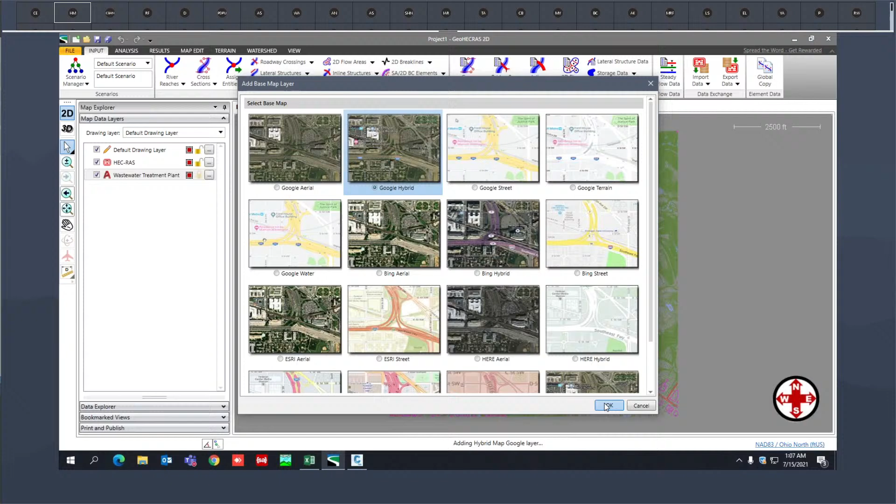Now, here you can see we have 16 different online mapping providers. We license the mapping content from these mapping providers directly from them. I am usually comfortable working with Hybrid Map by Google because this one gives a good mixture of aerial photos and labels for display. When I say OK to that, it's going to go ahead and throw a base map imagery in the background.

Now, if you notice here, our CAD drawing is perfectly lining up with the base map imagery. That is because we already had the coordinate reference system assigned to the CAD drawing. So our software automatically reprojects on the fly. Down at the bottom, you can see the coordinate reference system that we are working with.

However, if your CAD drawing doesn't have any projection associated, then in that case, you can go over to File menu, go to Map Coordinates Backstage page. Now, we list over 16,000 coordinate systems throughout the world. We have included all the coordinate reference systems that have been published and that we are aware of.

But if you have a custom CRS, that may be a well-known text file or a shapefile projection, you can directly tie that to our database. You can even mark that as favorite so that it's easy for you to use that next time. Now, you guys are from Indonesia, so if I type in Indonesia here, you can see it automatically filters out everything except Indonesia. You can see the different coordinate reference systems listed here.

If you select any of those coordinate reference systems, on the right-hand side, it will show you a small preview window showing the extent of that projection. And later, you can click on Apply to Map View. In this case, as we already have a coordinate reference system assigned, we're not going to click on Apply to Map View. Now, next, I'm going to go ahead and save the project.

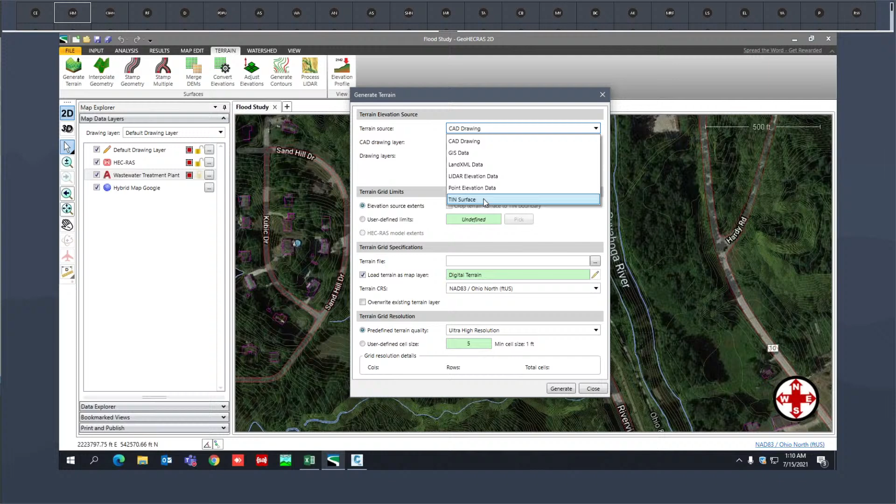Next, we need to define the CAD layers for reading the elevations. I can click on this define button. You can see all the CAD layers listed here. In this case, we are working with just the GIS contour. So I'm going to check that layer on. If you want the software to read the elevation from multiple layers, you can select them as well. I'll say OK to that.

Next, you can define your terrain grid limits. Here we will go with the elevation data source extents. That's the extents of our CAD drawing. Let's go ahead and save the terrain surface. Click on this browse button. Now, before we save it, from the drop-down you will notice that we can save this elevation grid in any of the 4 industry standard formats. We're going to create a GeoTIFF elevation grid and name it as 3D terrain.

Next, we can define at what grid resolution to create a terrain surface. I'm going to manually enter a value of 3 feet. That's about a meter. It's going to generate about 7.7 million cells. Click on generate. Now the software is building a terrain surface for us. We are going to utilize the terrain surface for figuring out the extents of flooding and for 3D visualization.

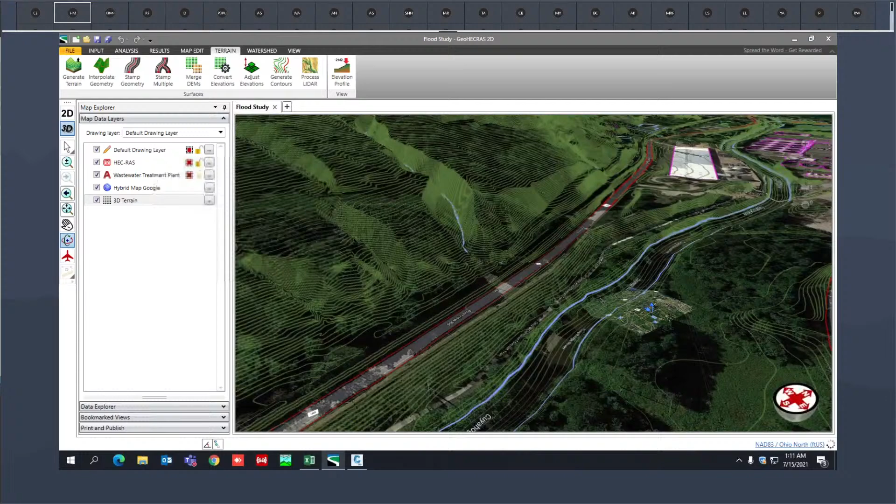Once you have your terrain layer added, you can now switch to a 3D mode. You can grab this rotation tool to rotate the view around. As you rotate the view around, you will notice everything is in 3D now. You can right-click on your terrain layer and choose Zoom to Layer Extents so that you can see the extents of our loaded elevation terrain data.

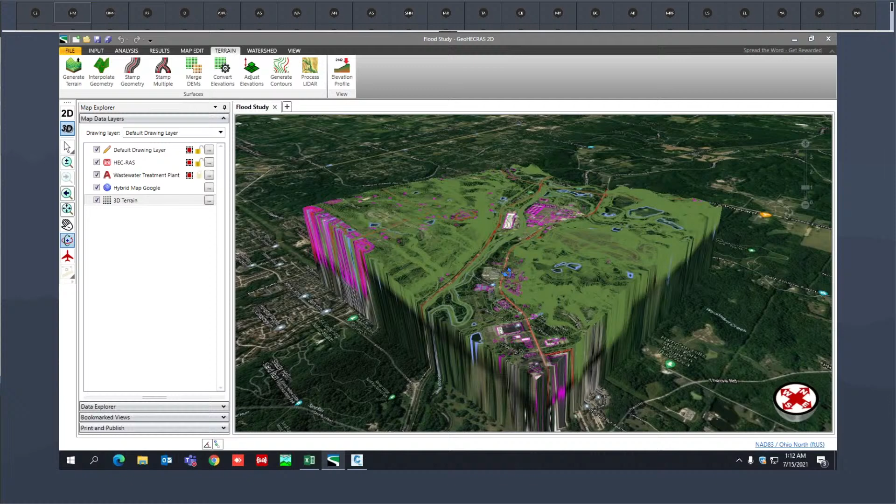Guys, can you just mute your microphone? Pedro, yeah, Pedro has a microphone. Can you just mute your microphone, please?

All right. Now you can see the extents of our loaded elevation terrain data. Now, we as civil engineers commonly run into a problem that we run out of elevation data. What we have done, we have licensed the elevation data from NASA, and we have hosted that on Microsoft Azure Enterprise Cloud Computing Platform. So I'm going to backfill the elevation data beyond the extents of our loaded elevation terrain data.

From our map data layers panel, I'm going to right-click and choose Add Elevation Layer. Now, if you have the elevation data saved locally on your computer hard drive or network drive, you can directly load that. You can see here the supported file formats that the software can read. You can bring any kind of elevation file format. You do not need to do any data conversion. In this case, we're going to go with the online elevation data that is hosted on our cloud. I'm going to have the software use that.

Now, as you are GIS users as well, I'm going to bring in some additional layers that Summit County GIS department provided us. From our map data layers panel, I'm going to right-click, and to bring in any kind of data, you just need to choose Add Layers.

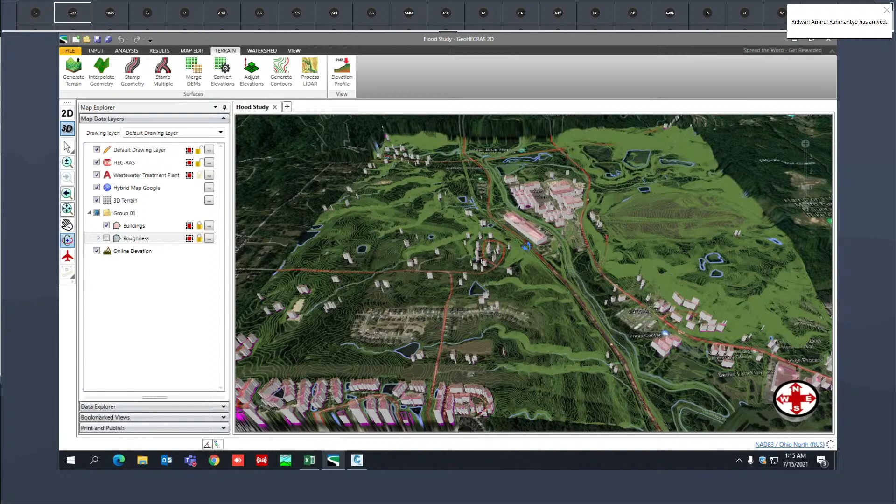You can also see those 3D structures. Now, these 3D structures are basically polygons representing the footprint of the building. We told the software to offset these polygons above the terrain a bit in order to make it look like these are 3D structures. Now, these buildings can be customized.

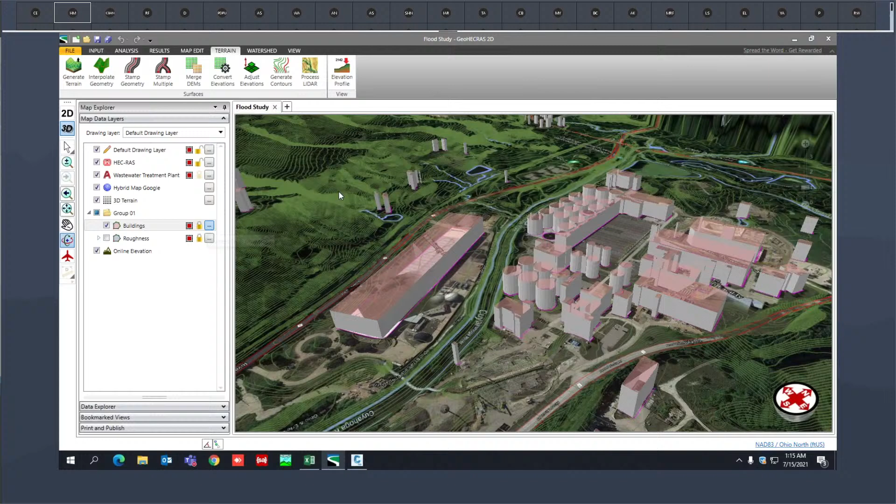If you want, you can click on that three-dot button. That's the Properties button for the buildings layer. It opens up your GIS Polygon Properties data dialog box. You have an option to change the color for the border stylization. You can change the color for your polygon fill.

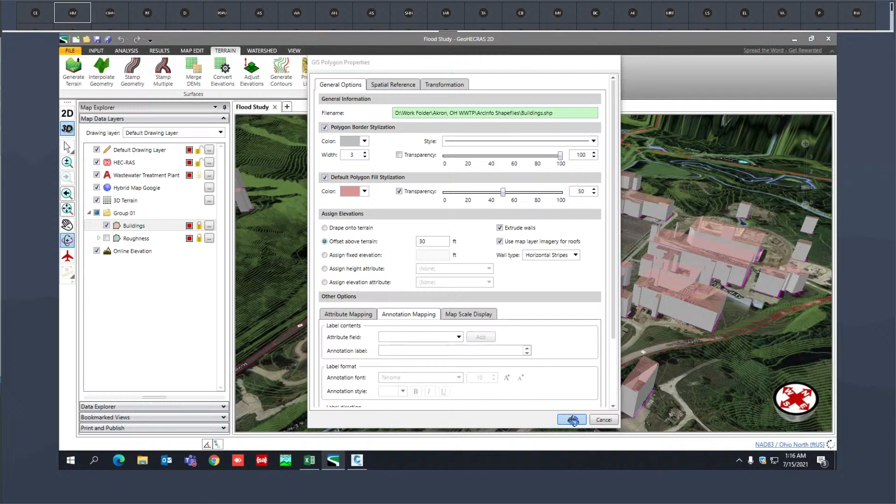Now, these buildings are just the footprints, so they do not have any height or elevation attribute associated. So we can simply tell the software to offset them above the terrain, let's say 30 feet. We can extrude the walls and use map layer imagery for the roofs. When I say OK to that, you will see how well those buildings have now been modified.

The next thing I want to do is to define my river. I can go over to Input menu, go to River Reaches menu. We have multiple ways that we can define our river reaches. If you already have a river alignment available in your AutoCAD drawing file or as a shape file, you can directly assign that. If you have a survey file that contains the river geometry, you can import it. If you have your existing HEC-2 or HEC-RAS model, you can georeference the river reaches.

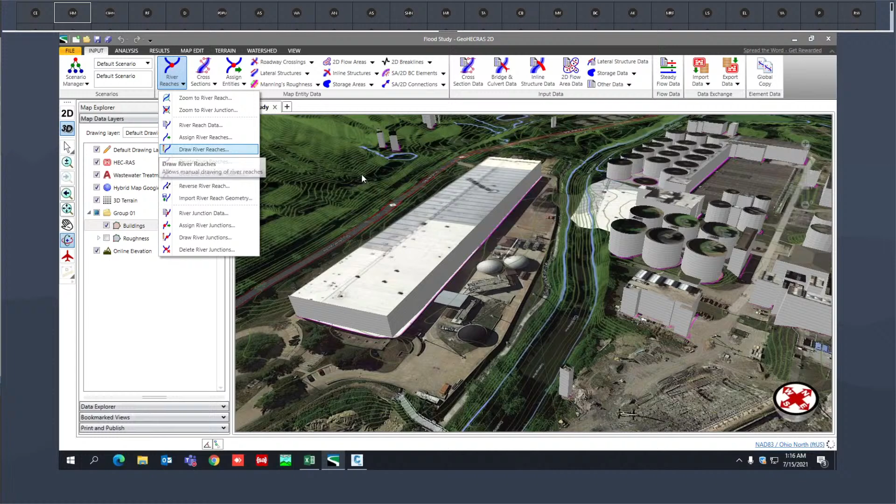In this case, we're going to use the Draw River Reaches command. If you notice, the software automatically puts me back into a 2D mode. It's going to create a curvilinear polyline. Click on that Draw button. If you notice and read down at the status bar, it says draw reach in an upstream to downstream direction. This river over here flows towards the north.

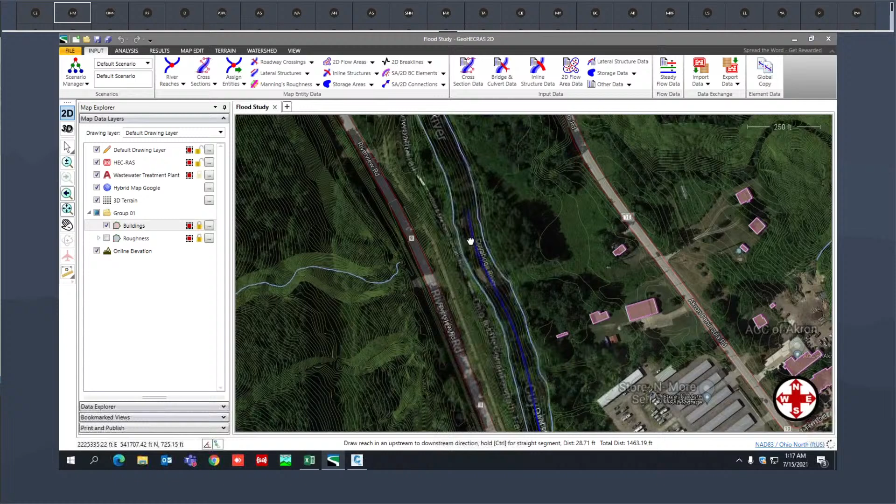So let's go ahead and start digitizing our river. I'm going to start over from here. You simply need to click and drag like I'm doing here. What's happening here in the background is that the software is built on top of AutoCAD. As I am digitizing that river, it's running a spline command in the background that is automatically curving that line for us. That gives our river kind of a more natural look.

If you already have those alignments somewhere available in your AutoCAD drawing file or as a shape file, you do not need to spend a lot of time digitizing the river reach. You can simply assign those alignments as your HEC-RAS river reach, and that's going to save a lot of time. Now, what I'm doing here, I'm just looking at those contours and trying to figure out where the channel thalweg is. Now, once you're done, you simply need to right-click and choose Done.

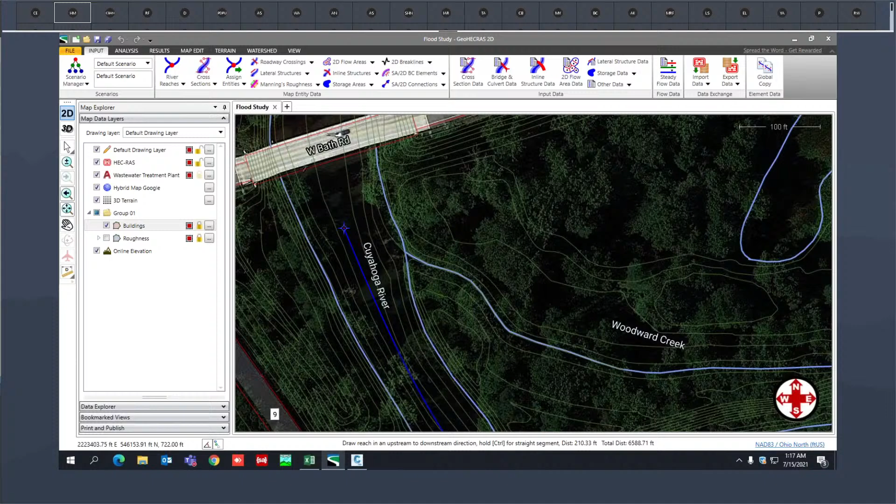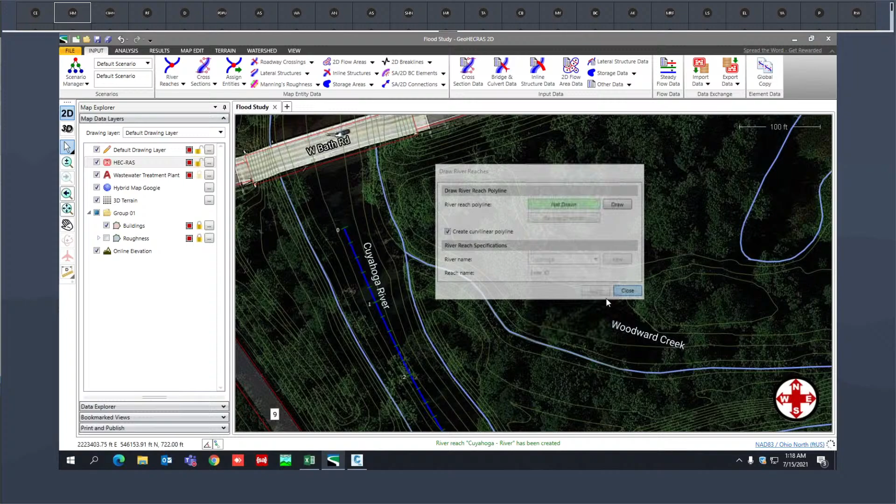Now, the software wants to know the name of the river and the reach. If you see on the map view, this is Cuyahoga River. I'm not a very good speller. It's good that I can see that on the map view. I can click on that New button. Let me type in the name. Let's call it Cuyahoga, give it a reach name as river, and click on Apply. Let me close the dialog box. If I zoom out and pan, now you can see the flow direction arrow on the map view.

Now, let's say you have defined your river in a wrong direction. You can right-click on the river alignment. It will open up your right-click context menu. And you can choose to reverse the river reach, and it will reverse your flow direction in case you have drawn your river in a wrong direction.

You can also choose Edit Vertices. You can see those small vertices here. I can grab any of those and move them around. I can click and add more vertices as well. Now, you do not need to do that. What I am really trying to point out here is that we have unlimited command over undo and redo.

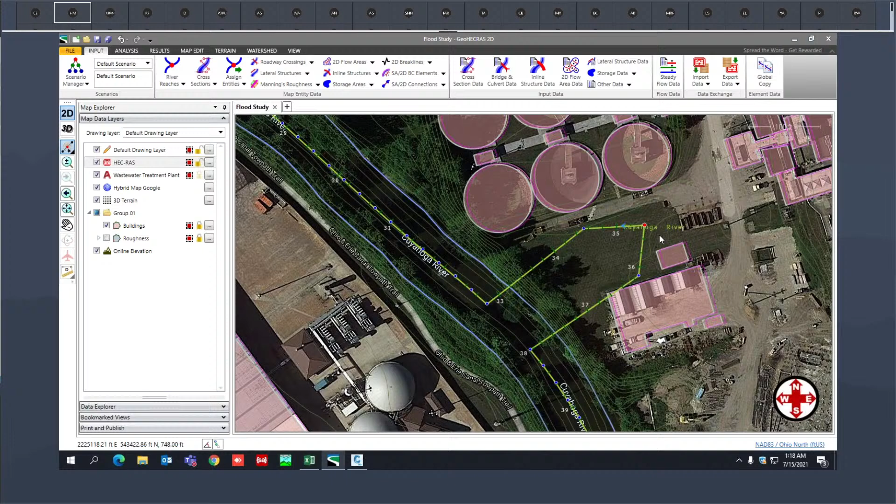If I turn off the base map imagery, let's say that you have made any mistake in your model, or you want to take a different direction. You can go to this undo stack option, undo all the changes that you have made, and you will be back in your project. You can also press Ctrl+Z to undo the changes.

Anyways, next thing I want to go ahead and define my cross sections. I can go to cross sections menu. Now, if you already have the cross sections or the alignments for the cross sections available on the map view, like from AutoCAD drawing file or as a shape file, you can directly assign those alignments as your HEC-RAS cross sections.

If you have a survey file that contains the cross section geometry, you can import that. If you have your existing HEC-2 or HEC-RAS model, you can georeference the cross sections. You can also manually draw in the cross sections. However, I'm going to have the software automatically draw them in. So we're going to use the automated draw cross sections command.

Now, the first thing that you need to do here is to define the downstream cross section stationing. You can tell the software how you want the cross section stationing to be. In this case, the project is in the US, so I'm stuck with feet and miles. In this case, I want the cross section stationing to match the river stationing in feet.

However, for your projects in Indonesia, you guys work with metric units, either meters or kilometers. When the software starts up, it automatically senses which country you are in. And if you are outside of the US, it will automatically default to metric units. You can also define the spacing between the cross sections. Here, I will go with the default value of 500 feet.

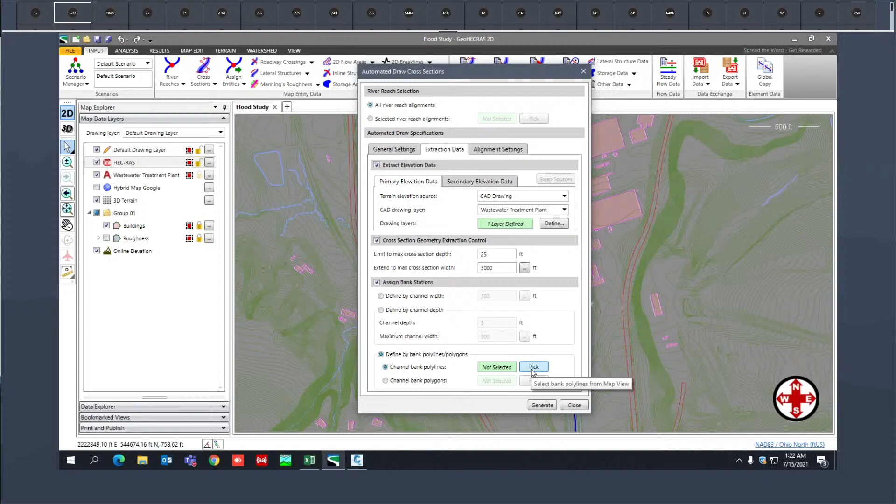You can also tell the software where the channel banks are. You can define your bank stations based on your assumed channel width. You can define that based on your assumed channel depth. Or if you have the polylines or polygons with you that represent your overbanks, you can utilize them. You can simply click on that pick button. In this case, we have the polylines.

Click on that pick button, zoom in a bit, and pick one of those alignments. To pick all others, simply right-click and choose Select Similar. It will select all others in the same layer. You can again right-click and choose Done. Now it says here we have 242 of those polylines selected. Click on that Generate button, and the software is generating our cross-sections. Let's take a look at what it did.

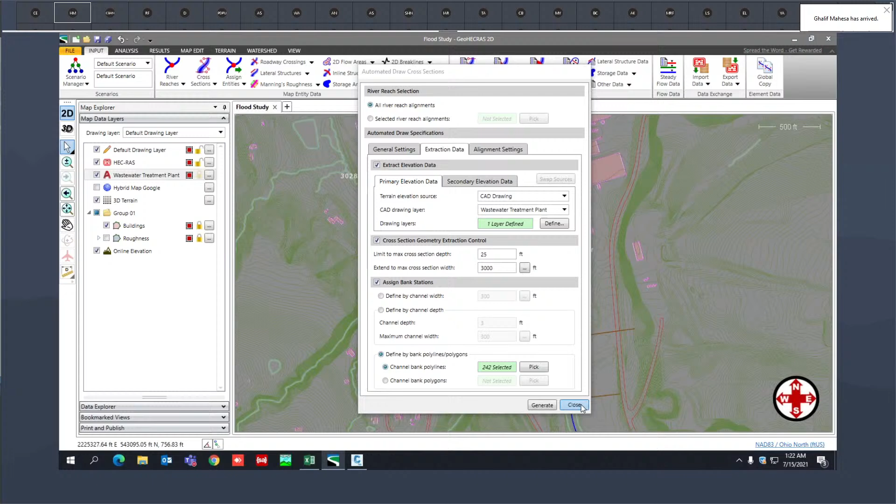If I close the dialog box, if I zoom out and pan, you will notice the software has automatically figured out how far it needs to extend the cross-sections to get 25 feet of depth. Now here at the wastewater treatment plant, the ground terrain is very flat, so the cross-sections had to be extended out quite far. There is a lot of flooding that's occurring at that plant.

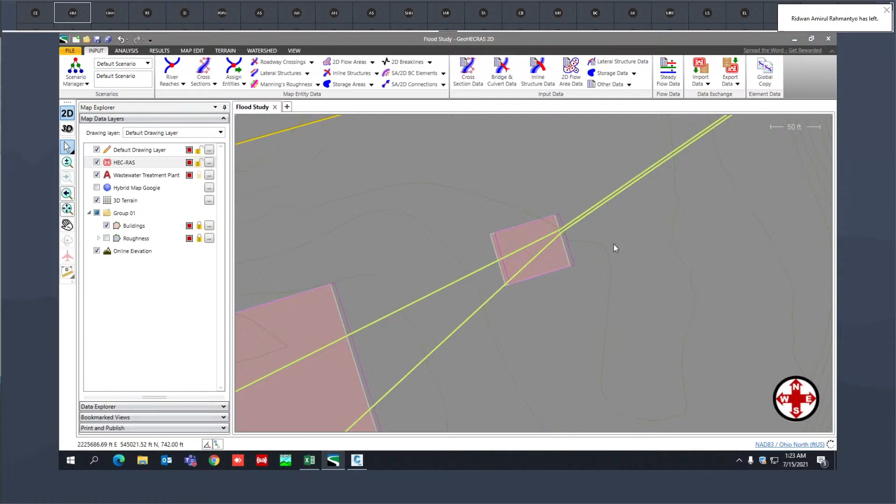In fact, if I zoom in a bit, you will notice that these two cross-sections are wanting to cross each other. But the software identified that and automatically bisected the intersection angle and ran these cross-sections parallel to each other. If you have two cross-sections crossing each other, that accounts for double conveyance and could be erroneous.

Now to view the cross-section, you can simply go ahead and double-click on the cross-section. It opens up our cross-section data dialog box. Here you can see your cross-section geometry, the channel thalweg, your bank stations. As you scroll through your geometry table, you will notice the highlighted rows representing your bank stations. You can see your bank stations down at the bottom as well.

Initially, the software assigns the default Manning's values based on what's in the channel and the overbanks. Here, it's using a default value of 0.032 for the channel and 0.045 for the overbanks. Now, these are just the default values. We're not going to use them. Later, we're going to map over the roughness from the shapefile that we loaded. It's going to assign the Manning's values to your cross-sections based on the horizontal stationing rather than what's in the channel and the overbanks.

Now, let's say that you want to go ahead and define a small flood wall on this left overbank. You can grab this pencil tool. It will put you in graphic edit mode. You can grab any of those ground shots and move them around. As you move the ground shots, the software automatically updates the table for you.

You can also choose to add more ground points. You can grab this Add Ground Points tool from the Tools palette here. I want a ground shot, let's say one over here and one over here. I can go ahead and zoom in a bit and define that more accurately.

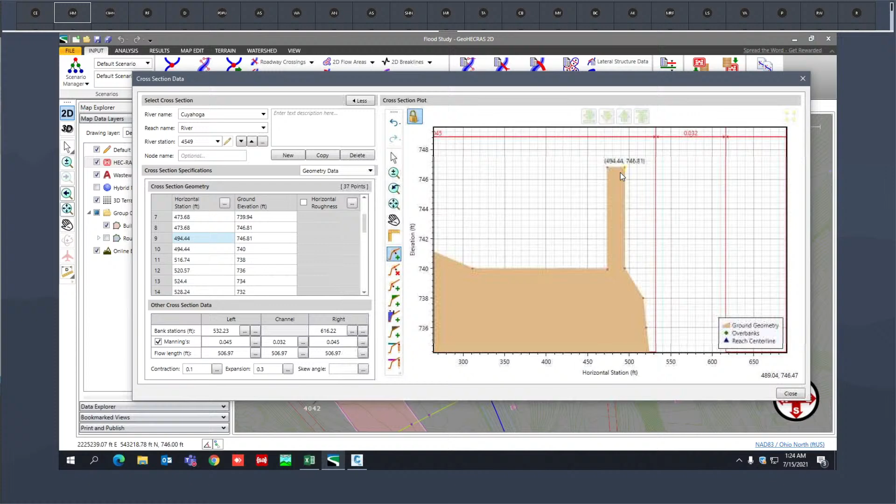Now, if you put in a structure like this in HEC-RAS, it will assume this is a divided flow. You will have a situation where it will show you the water within the channel and beyond that flood wall. So you will need to explicitly call it as a levee. You can grab this Add Levees tool from the Tools palette here. You can zoom in a bit and place a levee on the top of it.

If you notice, the software automatically switches me to an appropriate data panel, that is the levees data panel, and all the information has been automatically defined. So you do not need to manually define that information.

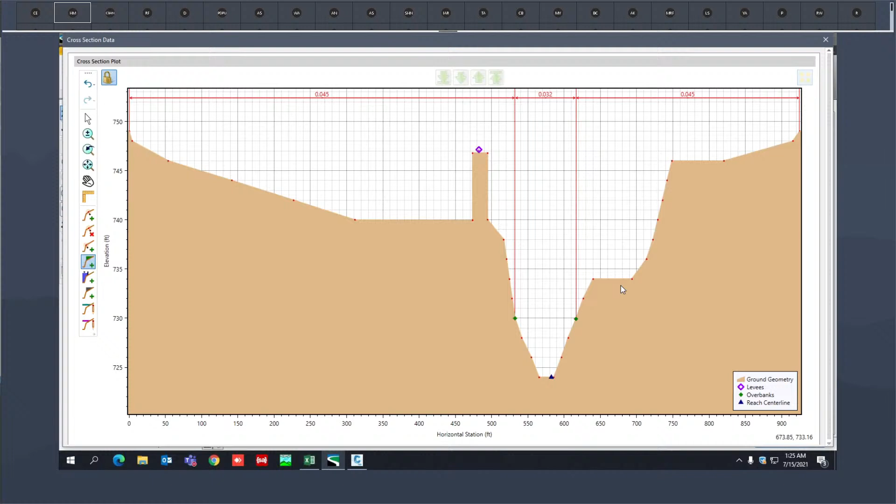One more thing that I want to point out here is that if I maximize the plot, on the right overbank, you can see there is a kind of a dead swale where I don't see much flow. I may want to mark this area as ineffective. I can grab this Add Ineffective Flow Areas tool from the Tools palette. I simply need to click and drag.

If I restore the plot, you will notice it again switches me to an appropriate data panel, that is ineffective flow areas, and the information for the right overbank, stationing, and the elevation is automatically being defined there. You may also want to mark this ineffective flow area as permanent. Simply check this box and we're all done here. Let me go ahead and close the dialog box.

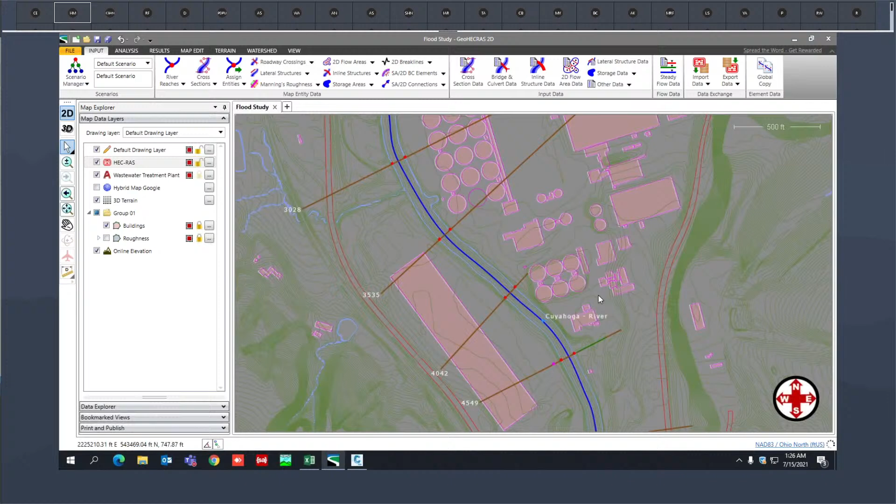Now, GeoHECRAS provides several GIS mapping functions that will help us map over GIS attribute data to the HEC-RAS model. And we may want to map over that land use roughness that we loaded. So let me turn that back on. Now, if I select any of those land use polygons on the map view and expand the data explorer, you notice that there's a roughness value associated to each of those polygons.

Now, from those polygons, we're going to map over the roughness data to our cross sections. To do that, from the Input menu, you can go to the Manning's Roughness menu and choose Assign Manning's Data. The first thing that you need to do is to select all the cross sections to which you want to map over that roughness data. Click on that Select All button.

Under the Polygon Layer tab, now you will need to define the Manning's layer and the attribute you're looking to map over to your cross sections. However, the software is smart enough. It automatically selects the appropriate layer, and from that layer, it automatically figures out which attribute to use. You can also see it figures out your maximum and minimum roughness values from the shapefile. You simply need to click on OK. It says Manning's roughness data successfully assigned.

Now, if I zoom in a bit, you will be able to see those sub-roughness areas as segments on the map view. You can see this polygon had a value of 0.055 assigned to it. Now that value has been assigned to your cross sections and can be seen as a roughness segment on the map view highlighted in purple. You can even see the corresponding Manning's roughness values showing up on the map view.

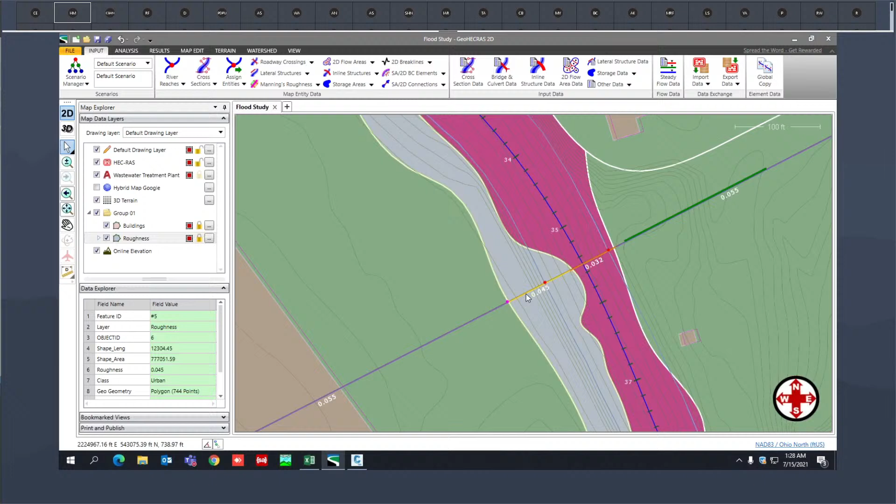Now from this polygon, there was a Manning's of 0.045 associated. That value has now been mapped over to your cross sections and is highlighted in the yellow segment. So you can see those roughness values on the map view as well using the roughness segments. Now let me do one thing. Let me turn off the roughness layer. Let's take a look at what it did. I can double click on the cross section.

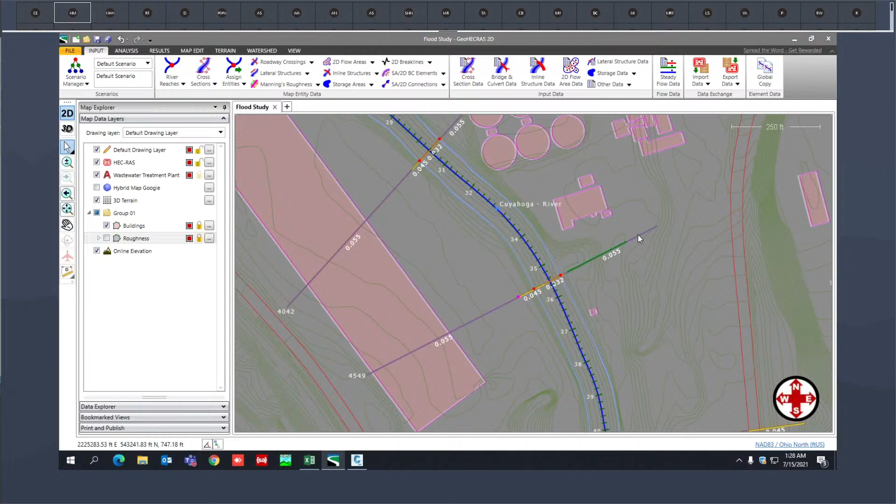From the drop down, if I go back to the geometry data panel, you will notice that the default Manning values that the software was earlier utilizing are grayed out. They're gone. Now the software is using the Manning's values from the shapefile. You have the multiple sub-roughness areas assigned to your cross sections based on the horizontal stationing rather than what's in the channel and the overbanks.

Now you also have an option to edit these sub-roughness areas. You can grab this graphic edit tool or the pencil tool. You can hover your cursor on the top of any of those lines. You can see that highlights it. If you click and drag, you can move it around. Once you release the mouse, it will snap to the nearest ground shot. And the geometry table for the horizontal roughness will be automatically updated.

If you're not happy with the changes and you want to go back, you have an undo option here as well. You can undo the changes and you will be back in your project and the table will be automatically updated or reset to default. Let me go ahead and close the dialog box.

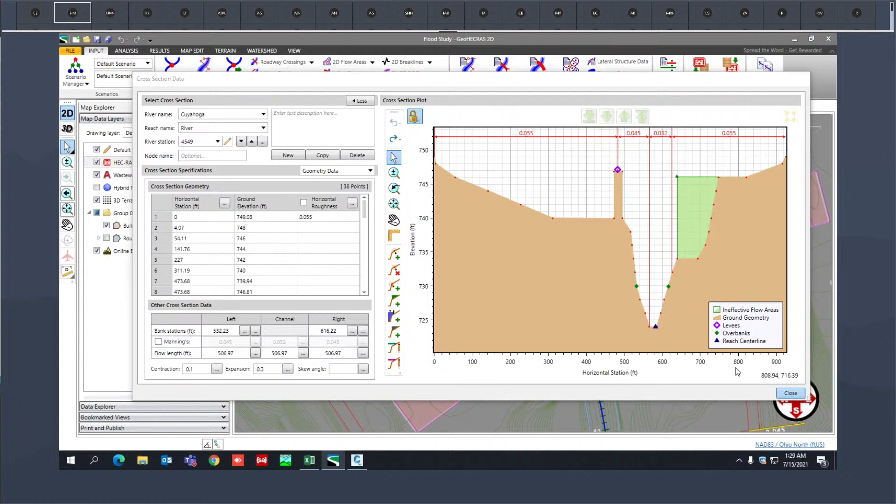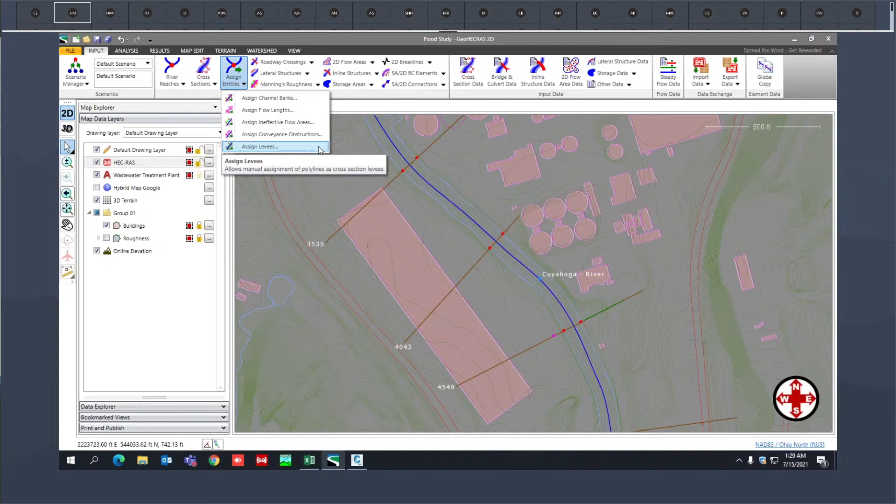We can also map over other data to the HEC-RAS model. If I go to Assign Entities menu, we can assign channel banks, we can assign flow lengths, we can assign ineffective flow areas, we can assign conveyance obstructions, and we can assign levees. I may want to assign these buildings as my conveyance obstructions. From Assign Entities menu, choose Assign Conveyance Obstructions. Simply select all the cross sections to which you want to map over those buildings as conveyance obstructions. I'll click on that Select All button.

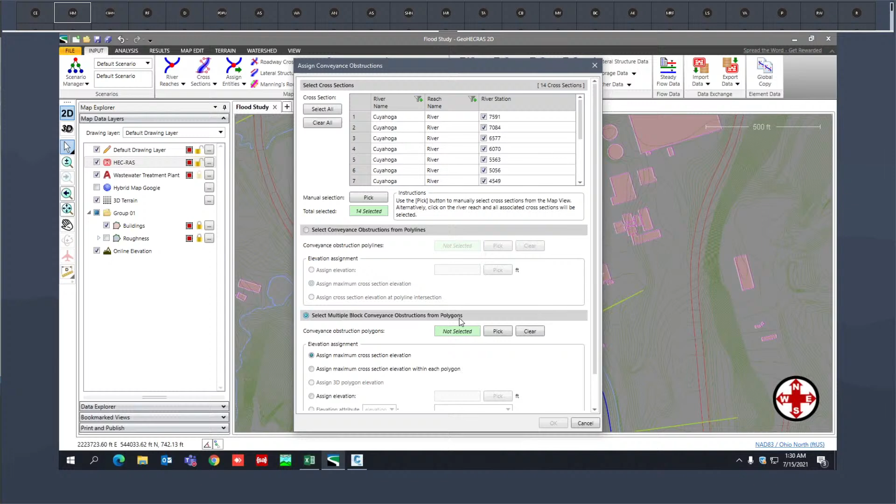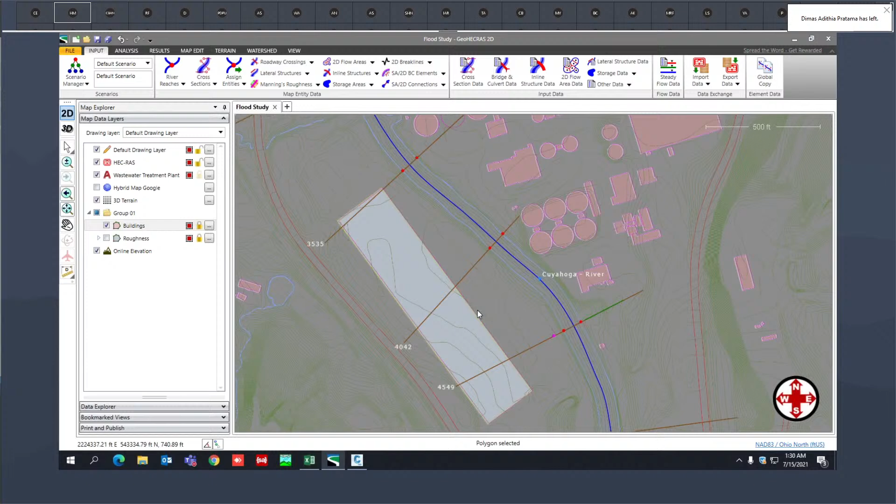Now you have an option to assign those conveyance obstructions from polylines, or you can assign those buildings as conveyance obstructions from polygons. In this case, we have the polygons. I can click on that pick button. I can pick one of those polygons on the map view. To pick all others in the same layer, right click and choose select similar. It will select all others in the same layer. You can see all of the building polygons glowing on the map view. You can right click again and choose done. Now here we have 352 of those polygons being selected.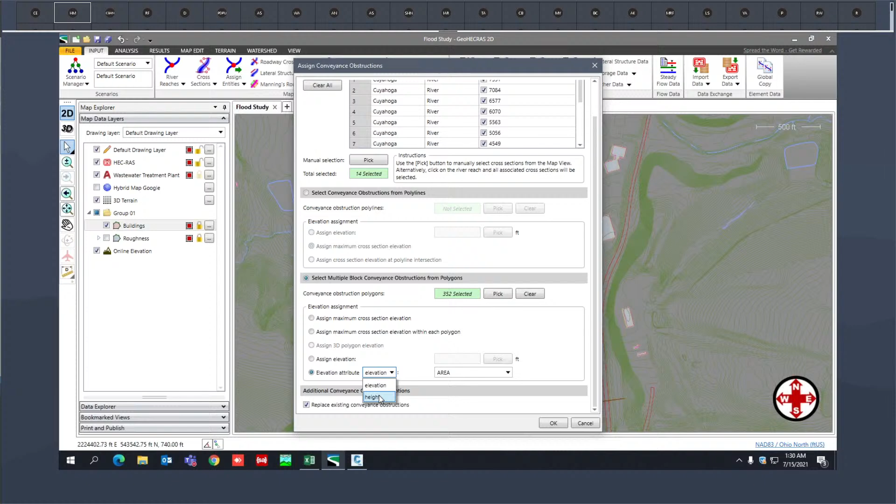For the elevation assignment to those conveyance obstructions, we're going to assign the maximum cross-section elevation. However, if the polygons have attributes like elevation or height associated, you can utilize that as well. I'll say okay to that. It says conveyance obstructions have been assigned. Now let me do one thing. Let me turn off my buildings layer and let me turn my base map back on.

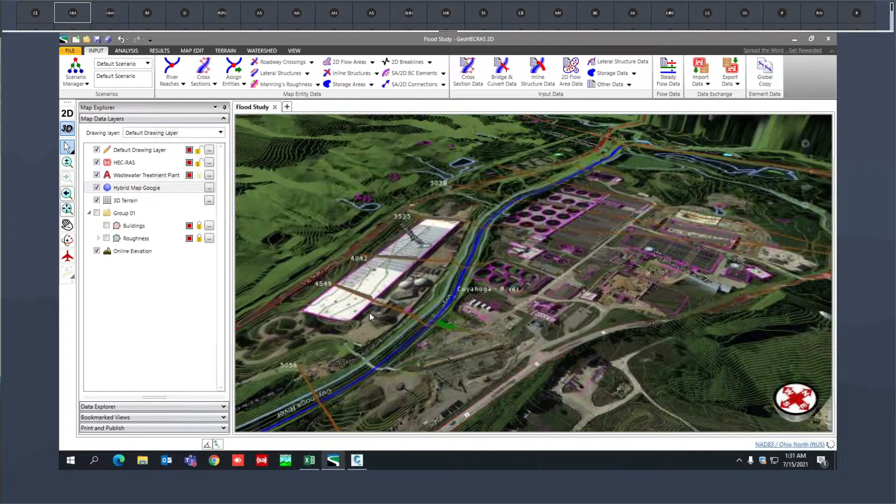Let's take a look at those cross sections in 3D. I can switch to a 3D mode. Let me zoom in a bit here. And you will notice why I would mark this area as ineffective. You can see there is kind of a dead swale. If the water goes in that area, it will not be conveyed downstream. It will be stagnant over there, swirling with zero velocity associated to it. So that's why that area needs to be modeled as ineffective.

On the other side of this cross-section, you can see the conveyance obstruction being mapped over to your cross-section. However, there's a problem here. If you notice, there's a small extension to this building that I was previously unaware of. What I can do, I can double-click on the cross-section. From the cross-section data dialog box, I can grab this Add Conveyance Obstruction tool from the Tools palette. Once you click on that, now you can click and drag and draw that extension to it.

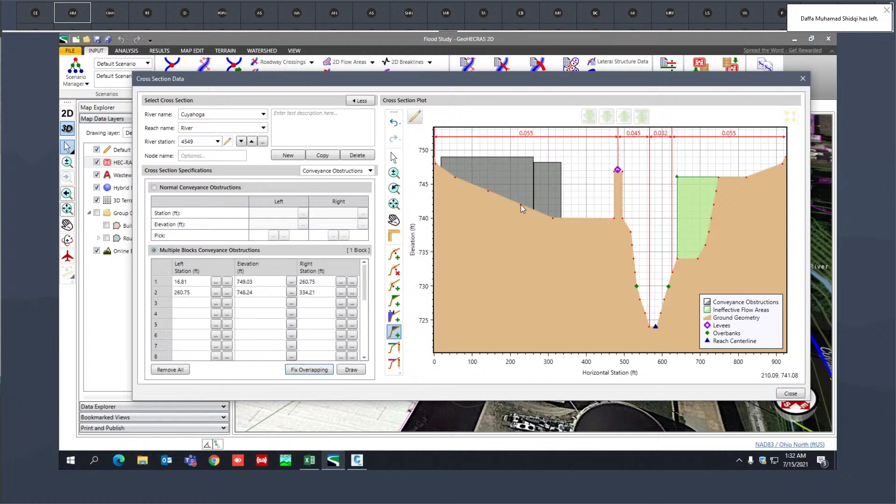HEC-RAS doesn't like this overlapping. To fix that, click on that Fix Overlapping button, and it does the trick for us. Let me go ahead and close the dialog box. On the map view, you can see that extension being added.

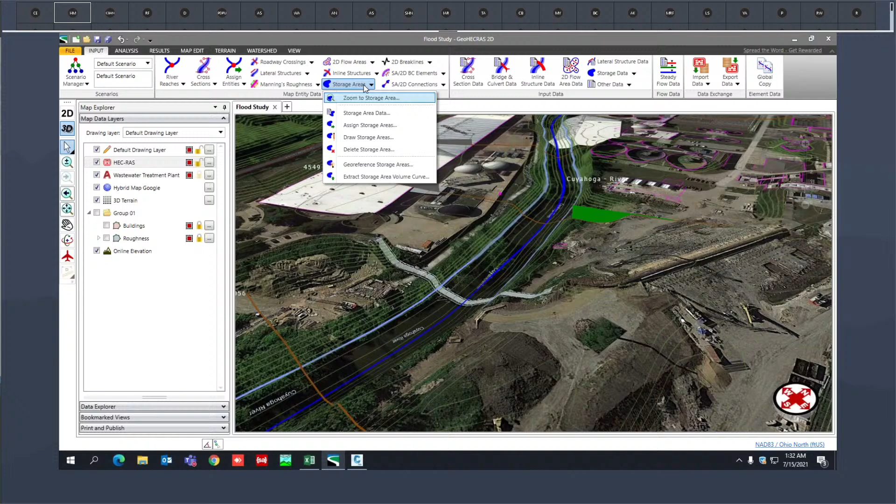Now, GeoHECRAS is a complete data wrapper to HEC-RAS, so it supports all aspects of HEC modeling. So you can define your roadway crossings, like bridges and culverts. You can define your 2D models, including hybrid models that have both 1D and 2D components. You can also define your lateral structures, such as flood walls, levees, and levee failures. You can define your inline structures, such as dams, spillways, and dam failures. You can define your storage areas like inline lakes, reservoirs, detention ponds, and off-channel storage areas.

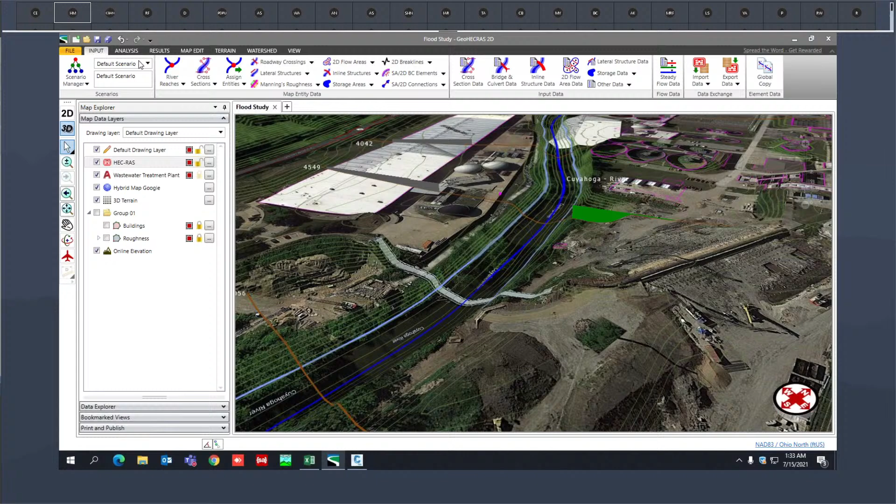If I go over to Analysis menu, we can model both steady flow and unsteady flow models. We can also do the steady flow calibration or compute scour at bridges. Now we're almost ready to run the model. We just need to define our boundary condition. In this case, we're going to run this model in steady state. From Input menu, I'll go to Steady Flow Data. This opens up my Steady Flow Data editor.

I'll go to the Flow Data tab. Let's say we have 3 different profiles for 3 different return periods. Let's say for a 25-year, 50-year, and then 100-year storm. We need to now define the corresponding discharges.

Now for 25-year, let's say we have a discharge of 8,000 CFS, that is cubic feet per second. However, there in Indonesia, you work with cubic meter per second. So we can work with both the units. For 50-year, I'll set that to 12,000. For 100-year, I'll set that to 16,000.

Next, we need to define the downstream boundary condition. And here, in this case, I'm going to set that to normal depth. And HEC-RAS will compute the starting water surface elevation based on the defined energy slope. Now, what you can do is measure the water surface elevation at 2 points near the downstream end of the river to approximate that slope.

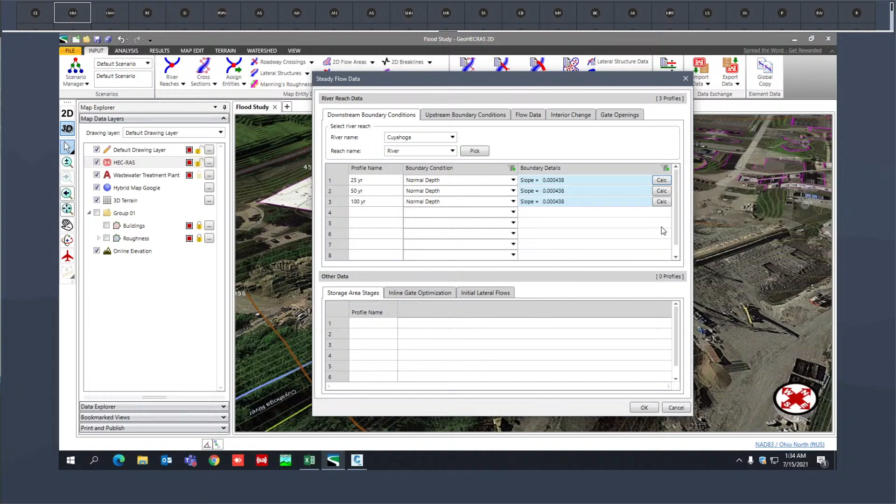However, many times you cannot do that, since that might be someone's property you do not have access to, or you do not have the engineering budget to measure it. Whereas in our software, you can click on the Calc button. The software will automatically compute an approximate energy slope by looking at the channel bed bottom slope. Software will run various trend lines upstream from the downstream boundary for up to 1 kilometer, and then use best fit line algorithm to estimate what the energy slope is.

If you already know what the slope is, maybe you have computed that already on the field, you can type that in here. I'll have the software calculate that for you. I'll say okay to that. Now we are ready to run the model. I can go over to Analysis menu and click on that small running person, Compute Study. It's going to go ahead and run our HEC-RAS simulation.

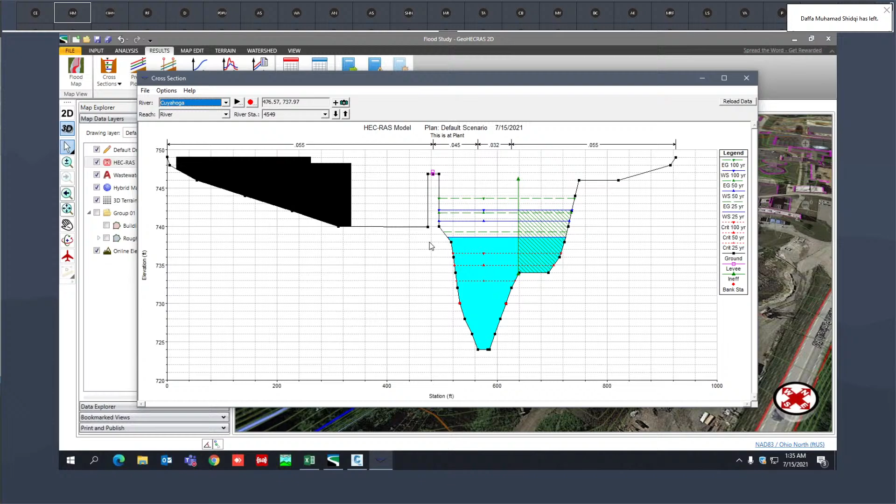As the HEC-RAS simulation has completed, let me go ahead and close the dialog box. Next, we can take a look at the results. You simply need to go to Results menu. Let's take a look at the results for this cross-section here. I can select that cross-section on the map view and then go to cross-sections. The end results that you will get would be directly from HEC-RAS. We are a complete data wrapper of HEC-RAS. Let me go ahead and close the dialog box.

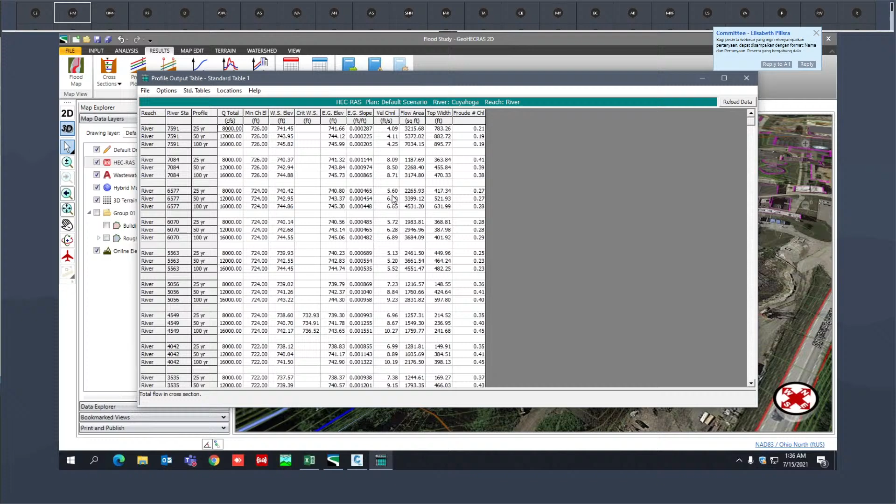You can take a look at the other results like the profile plot showing you the longitudinal profile of your model. You can also take a look at your rating curve. You can look at your stage and flow hydrographs for your unsteady flow models, or the detailed output table for each of those cross sections or any hydraulic structures in your model. You can also take a look at your summary output table. Now, these are the standard HEC-RAS output tables. So you do not need to worry about the accuracy of the results. So let me go ahead and close that.

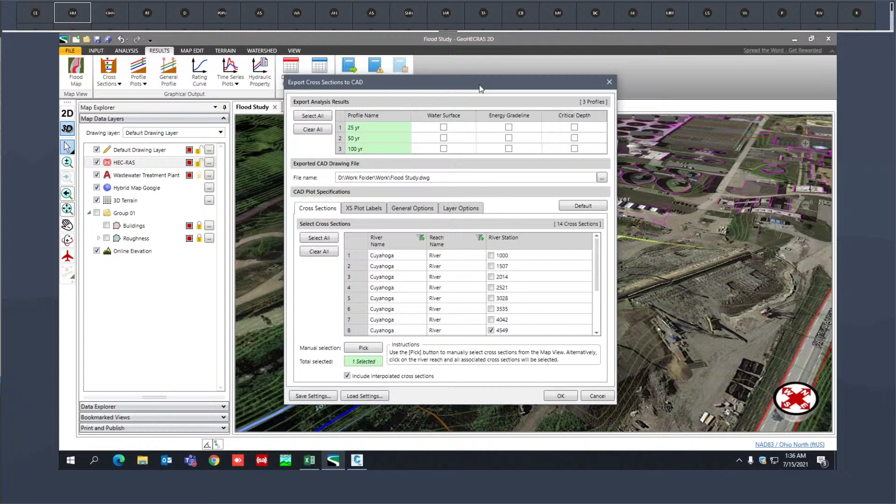Now, if you want, as your CAD users, you have an option to export these cross-section plots out to AutoCAD. If you click on the drop-down where it says cross-sections, you can choose Export Cross-Sections to CAD. So let's go ahead and export our cross-sections to AutoCAD. Now here, you can also have the software include the analysis results. So here I will have the software include the results for my 100-year water surface profile. I'm going to have the software export out the water surface, energy grade line, and critical depth.

I can go ahead and save the file, click on that browse button. I can navigate to my Exported CAD folder, and let me go ahead and rename this to XS Plots. Now from the drop down, you will notice that we can save this file in any of the formats, starting from DGN format if you're a MicroStation user, DXF all the way to DWG 2018. Click on Save. Simply select all the cross sections which you want to export out to AutoCAD.

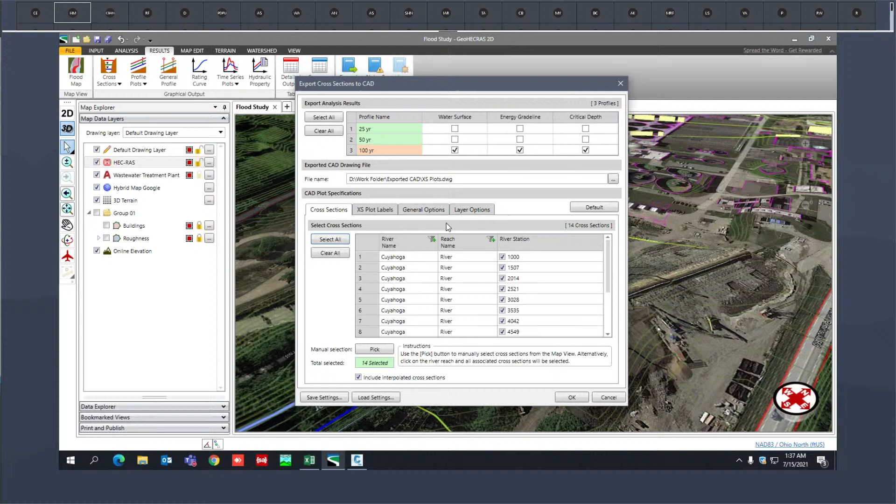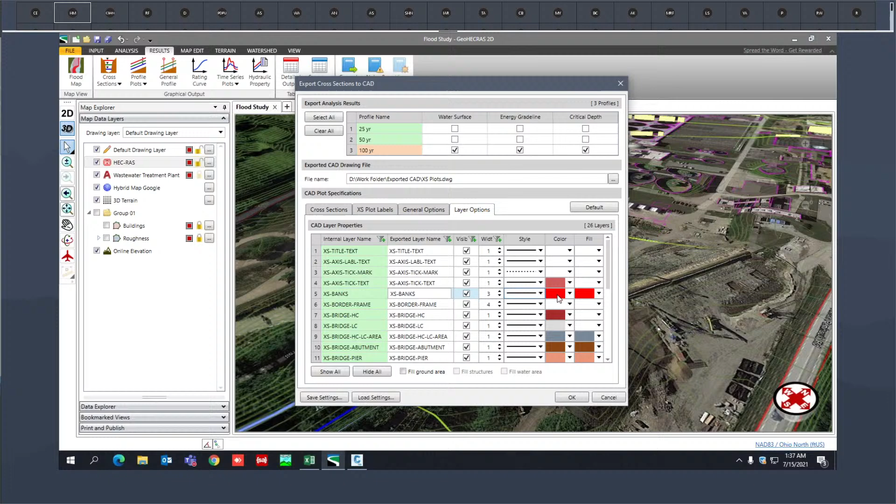Under the layer options, we have already provided the internal layer names. Like for the banks, we call them XS banks, cross-section banks. However, you have an option to rename them. Maybe your client has a different requirement. They want to call it something else. So you have an option to rename it as well. You can also change the line style, the color, and the fill. You can also have the software fill the ground area, fill structures, and fill water area.

Click on OK. It's going to go ahead and write those cross sections out to AutoCAD. Now, if I go ahead and open up AutoCAD here, let me open those cross section plots in AutoCAD. Just give it a moment.

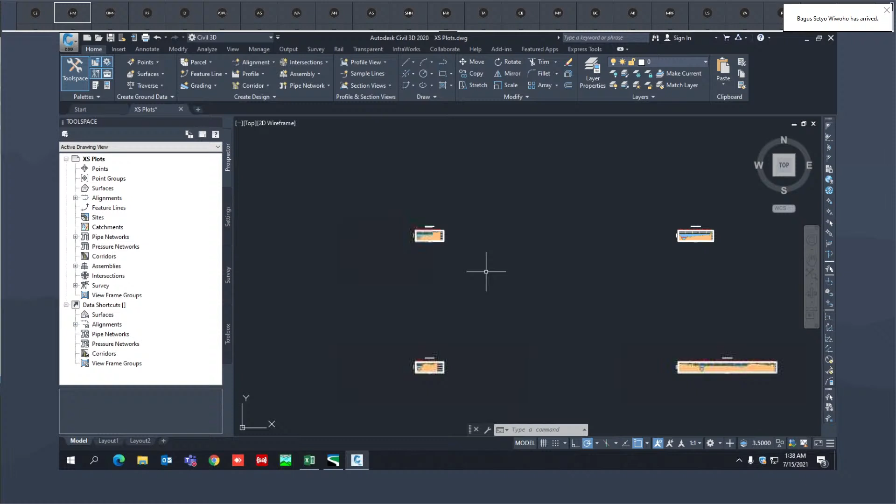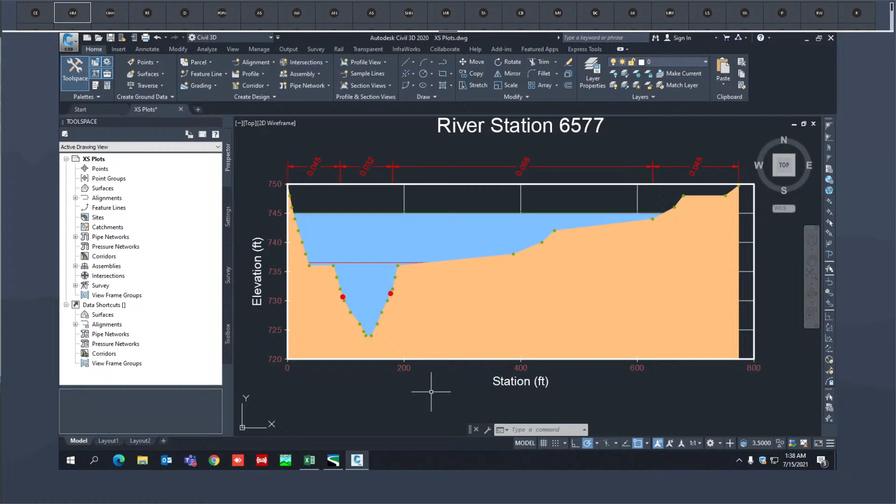Now, if I zoom in a bit here, you will be able to see those cross-section plots in AutoCAD. And you can provide this to your clients. You can see the stationing, the elevation on the y-axis. You can see your multiple sub-roughness areas and your critical depth, your energy grade line, and your water surface as well with the fill. And let me go ahead and close that down.

Now, next thing we would want to do is to create our flood map from the computed HEC-RAS results. From the results menu, we'll go to flood maps. Now here we will have the software create a flood map for our 100-year water surface profile. It's going to create a detailed intersection with your terrain model.

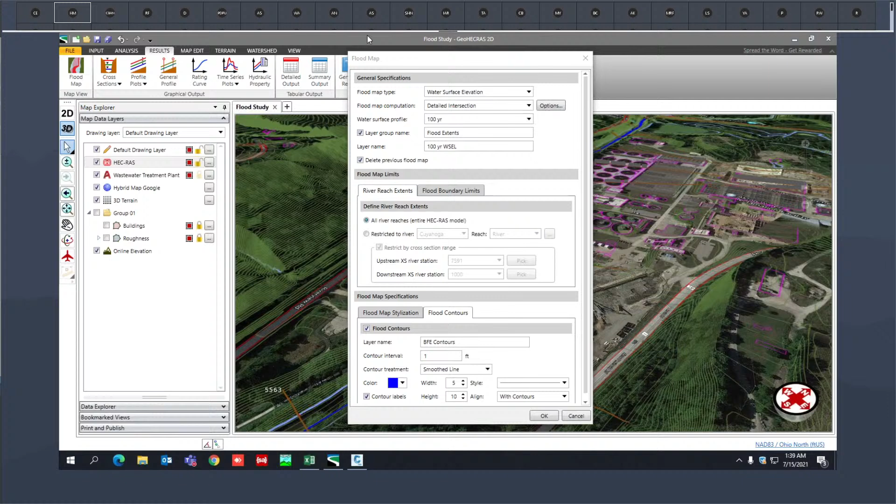Additionally, you can also tell the software to stylize the flood map. You can change the color for the border stylization. You can change the color for your fill. If you go to the flood contours, you can also have the software generate the base flood elevation contours and display contour labels on the map view. Now you can click on that OK button, and the software is now generating our flood surface based on our terrain model.

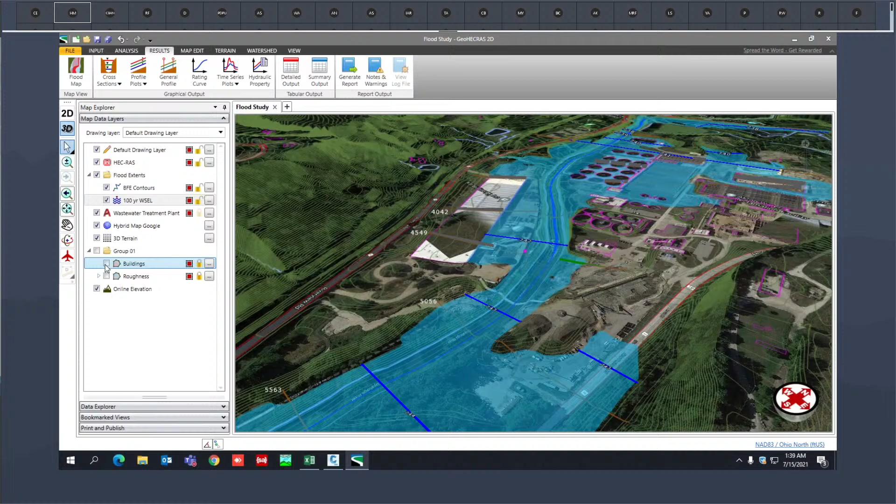There we have the flood map being generated. Now I can turn on the buildings layer. There you can see it. I can grab this rotation tool. I can rotate the view around.

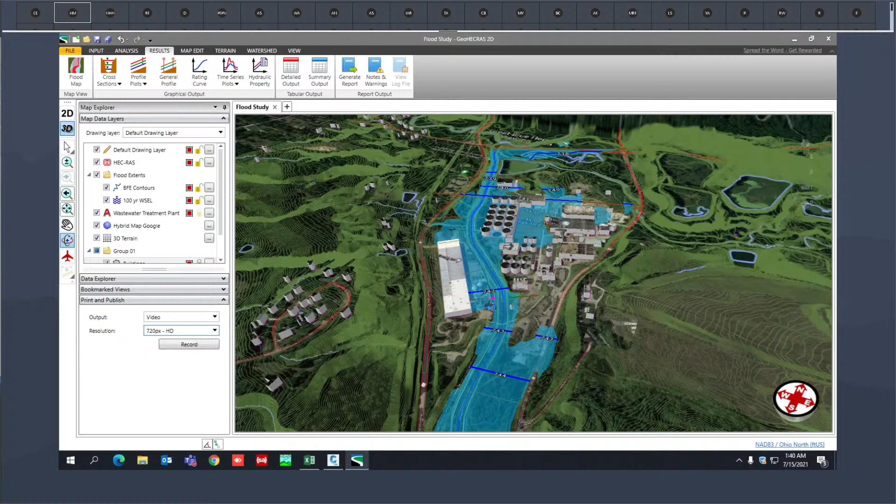Now, if you want, you can expand the print and publish panel. You can take this out as a graphic file for your clients. You can take it out as a print file or even PDF. You can also record a video from it. Simply define the resolution for your video, set your zooming angle, set your inclination angle. Once you're happy with that,

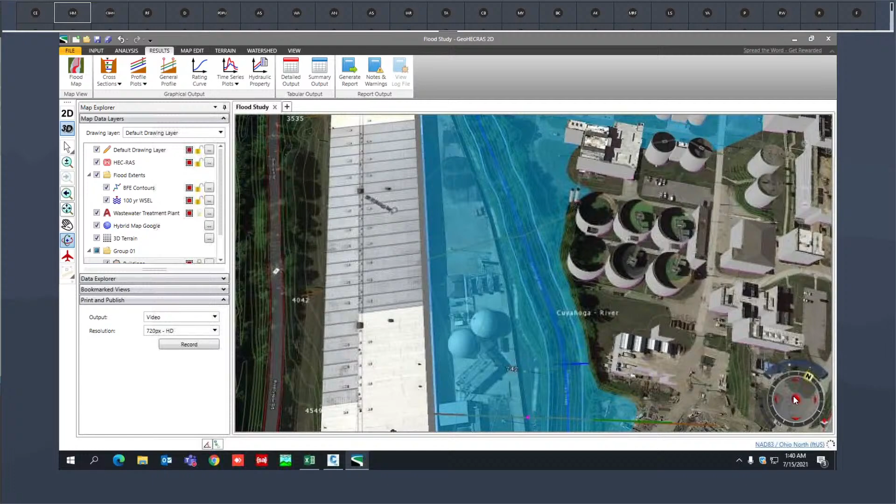simply go ahead and hit that record button and save this as a Windows media file on your computer, and later hover your cursor on the top of this compass rose. This turns into a 3D navigator. You can go ahead and practically fly down the river and record an animated movie for your clients. We have a gaming technology built into the software, so you can use your joystick as well.

Now, having all these pretty pictures is not worth anything unless we can share that with other programs. And key to this program is that it can interface with multiple other softwares as well. So if I go over to input menu, go to export data, we can export the model out to normal HEC-RAS. So we have already created the HEC-RAS project in GeoHECRAS, but if you want, you can export your GeoHECRAS model out to normal HEC-RAS.

You have two options here. You can just export out the input data files, or you can archive your HEC-RAS project, include the output files and all the supported files like the terrain and the land cover. You can also include your base map imagery.

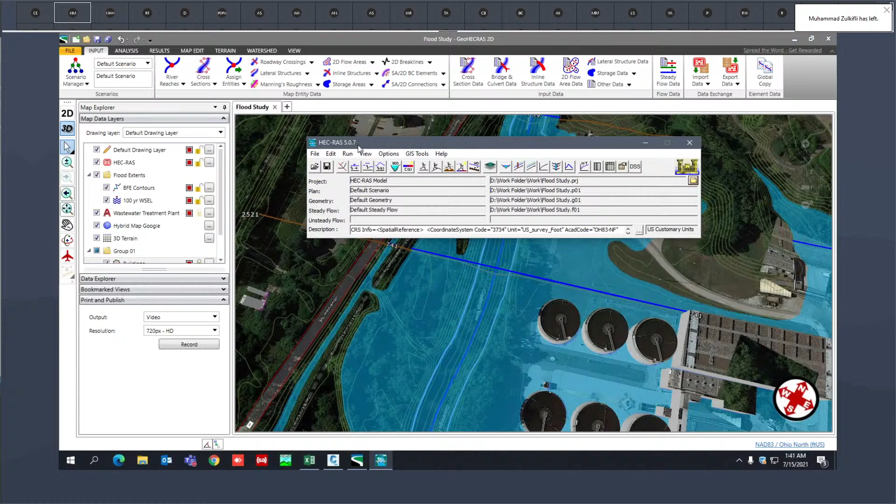Now I'm going to show you a shortcut how to open the same project in normal HEC-RAS. If I close this down, you simply need to right-click on your project tab and choose Open in HEC-RAS. It will take all those HEC-RAS model files and launch normal HEC-RAS on our screen. So this is the normal HEC-RAS interface. This is HEC-RAS version 5.0.7. Now you can go to that Geometry Data tab. It will load the same project in normal HEC-RAS as well.

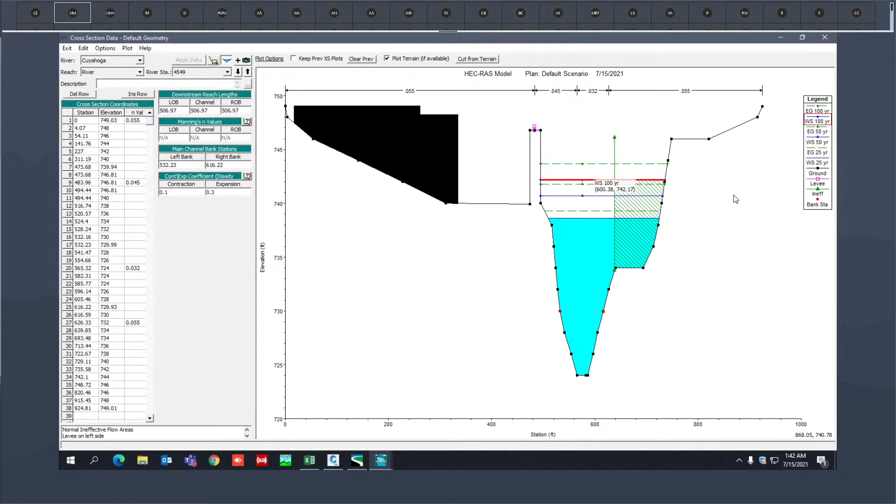If I select any of those cross-sections like the one that we were earlier working with, I can select that cross-section and choose Edit Cross-section. Now there you can see the same cross-section in HEC-RAS as well. Now it also reads the results from the same project directory, so you do not need to run the analysis again. Let me go ahead and close that. That was just to show you.

You can also export your HEC-RAS model out to AutoCAD. So let's take a look at that. I will choose Export HEC-RAS to CAD. Let's go ahead and save the file first. I can click on that Browse button. And I've already created a folder named Exported CAD. I will save it right there.

Now you can tell the software what HEC-RAS input and output data you would like to export out. Like from the HEC-RAS inputs, you can include your river reach, the flow direction arrow, river junction, if any. Under the cross-section, we give you two options. Either you export your cross-sections as 2D polylines or 3D polylines, that is the elevation points.

You can also include your output results like the computed flood map and the base map imagery, either in high, medium, or low resolution. Click on Export. Now the software is writing the project out to AutoCAD.

Now it has been exported out. Let me open up AutoCAD Civil 3D here and let me open the project. Now there you can see the same project in AutoCAD as well. Now what I'm going to do here, I'm going to go ahead and turn off some of the layers. I will turn off my base map imagery and the flood fill extents. Let me go ahead and close the dialog box.

You can also export your project out as Esri GIS shapefiles, or you can export your HEC-RAS model to Google Earth. Now, what I'm really interested in showing you is the exported model in Google Earth. When you need to present your results to clients who are not so tech savvy, like they don't understand AutoCAD, HEC-RAS, or GIS, you can simply provide them this KMZ file, which is a zipped KML file. It's going to zip all those HEC-RAS input and output data into a single file.

Now, here you can define the HEC-RAS input and output for the cross-section results and the computed flood map. Here, I will go with the default settings and click on Export. As I am running a free version of Google Earth, it will automatically launch it on our machine, and it will take us to that project location.

Now there, you will be able to see the same project that we just created in GeoHECRAS in Google Earth. Your HEC-RAS model is seamlessly being shared with Google Earth as well. You can see all the elements here, like your river reach, your cross sections, BFE contours, and the flood map.

If you want to take a look at any of the elements like this cross section here, you can click on it. It will show you a graphical plot with all the attributes like the river station, plan, profile, water surface elevation, the corresponding discharge, top width, computed velocity, maximum channel depth, and minimum channel elevation. And you can provide this to your clients and they will still be able to see the results. Let me go ahead and close that down.

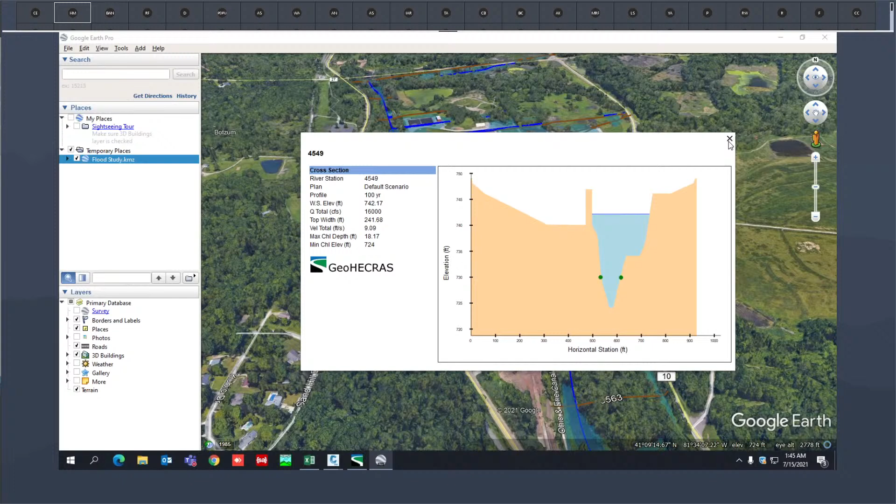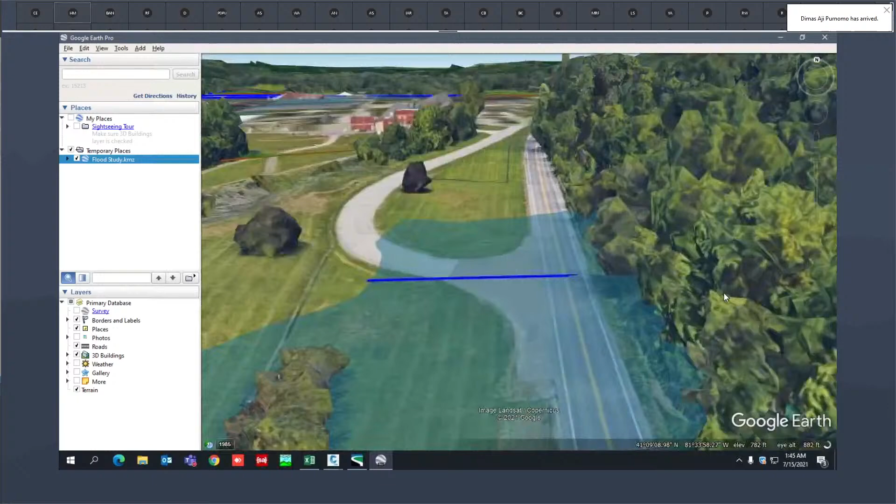You can even grab the small person on the top over here and simply drop him in the flood zone. Now there you can see your model in Google Earth. When you show your clients this kind of output, they will think that you might have spent hours and hours creating such a project. You do not need to tell them that you made that happen with just a single click, right? So let me go ahead and close that down.

All right, guys, I think that should give you a good perspective about doing 1D HEC-RAS modeling using GeoHECRAS.

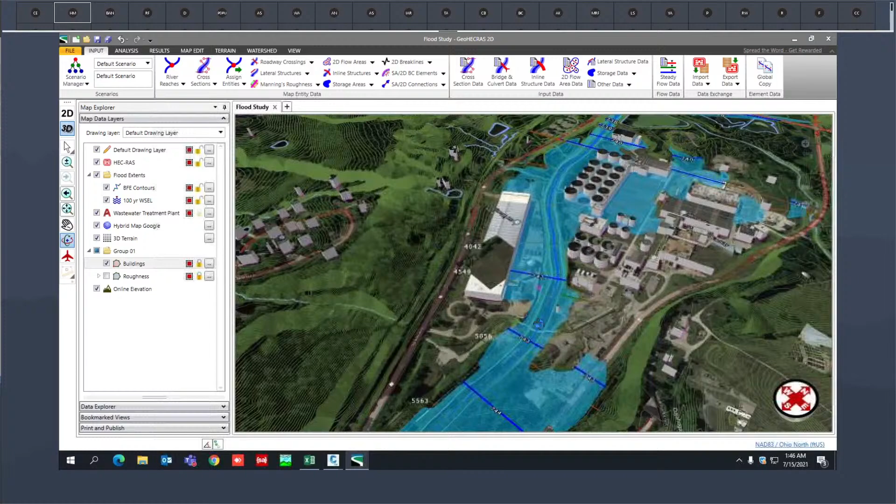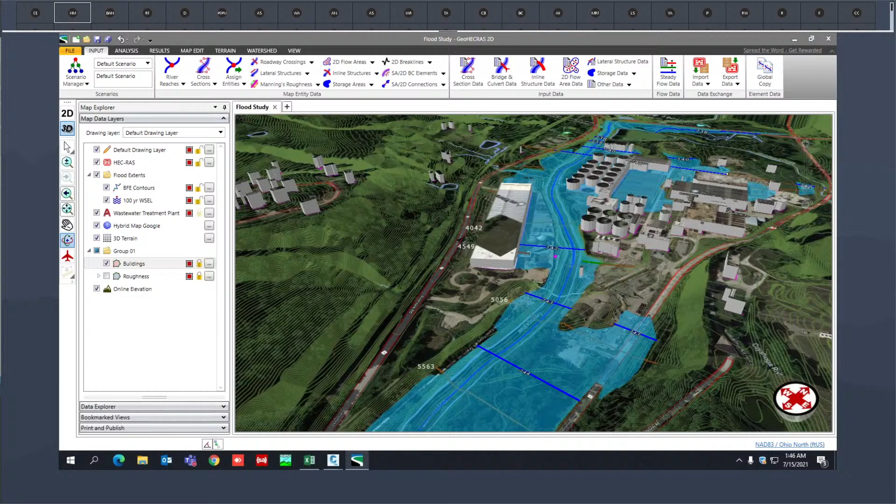Thank you, Hank, for your presentation. So I've got a few questions that were delivered to me by private chat. The first from Lisa. Lisa, can you open your microphone and ask the question directly? Elizabeth Pilistra. Yeah, before Lisa jumps in, I have a question from Erland.

Okay. So to everyone, the question was that they were conducting some research about flood modeling and simulation, but it has a limit to roadway crossings for finite element method analysis. The thing is that until 5.0.7, HEC-RAS used the finite difference method for 1D models. Now with HEC-RAS 6.0 being out, we have the finite volume method available, with some limitations where you cannot use the Preissmann slot and you cannot use the modified Puls method. Those are the two limitations of using the finite volume algorithm scheme for 1D models.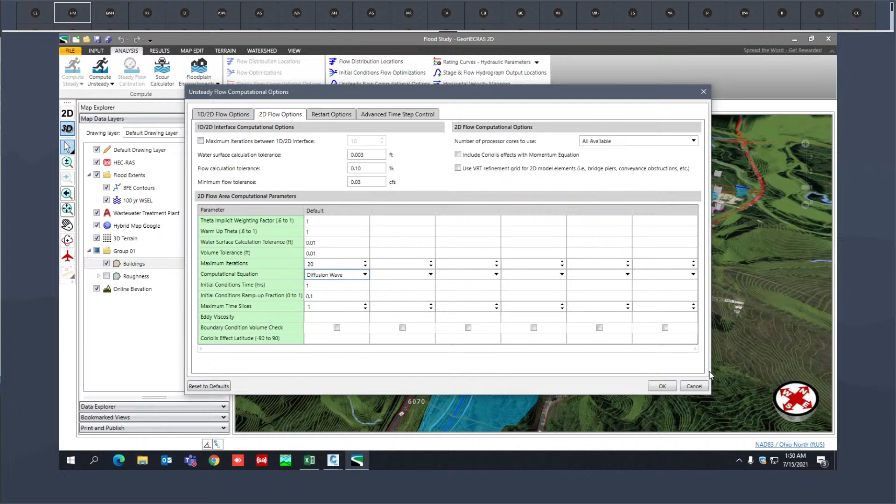The 1D equation solver, you can change it from here. For the 2D flow options, there are two methods, diffusion wave and the full momentum equation, but it's already using the finite volume solution scheme. So when having the interaction between 1D and 2D models, you can use the finite volume solution scheme for both parts of the model, 1D as well as 2D.

Okay. Thank you. The second question is from Rahma Fitri. She asked three questions. First, why do we need to mark the ineffective flow area? What is that for? What if we do not define the ineffective flow area, since there are lots of them along the river, and it's quite hard to define them one by one?

Yeah, it's a very good question, and we have a very good fix for that. Firstly, you will need to define ineffective flow areas in the cross sections that contain water that is not being actively conveyed. Ineffective flow areas are often used to describe a portion of the cross section in which water will pond, but the velocity in the downstream direction is close to zero. This water is included in the storage calculation and other wetted cross-section parameters, but it is not included as part of the active flow area.

When using the ineffective flow area, no additional wetted perimeter is added to the active flow. You will need to define that where you have roadway crossings, for both overbanks. Ineffective flow areas often occur near roadway crossings where water levels exceed the channel banks and water cannot flow longitudinally along the overbanks due to the roadway fill. When this occurs, flow must contract to pass through the opening under the roadway, adding additional and often significant losses.

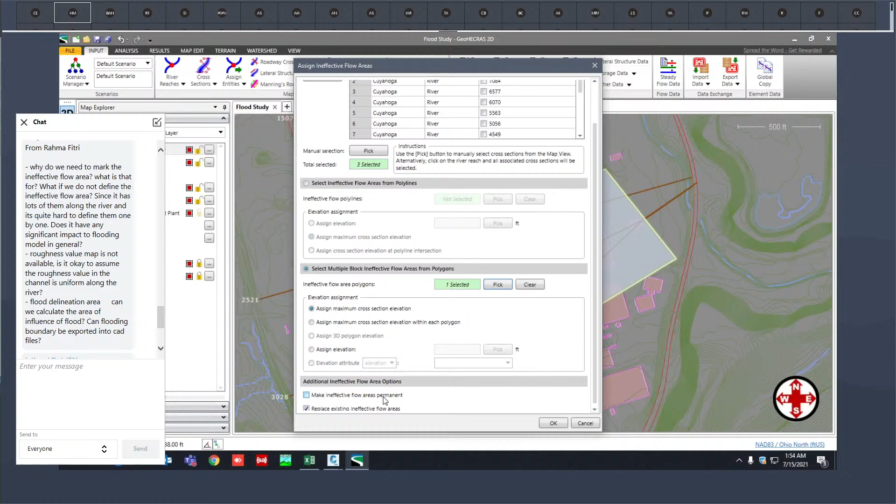I'll click on OK. Now, if I turn off the default drawing layer, you can see if I double click on the cross-section, the area over here is marked as ineffective right there. That way, you can assign the ineffective flow areas to multiple cross-sections at once without you having to do that one by one. Hope that answers your question. Okay.

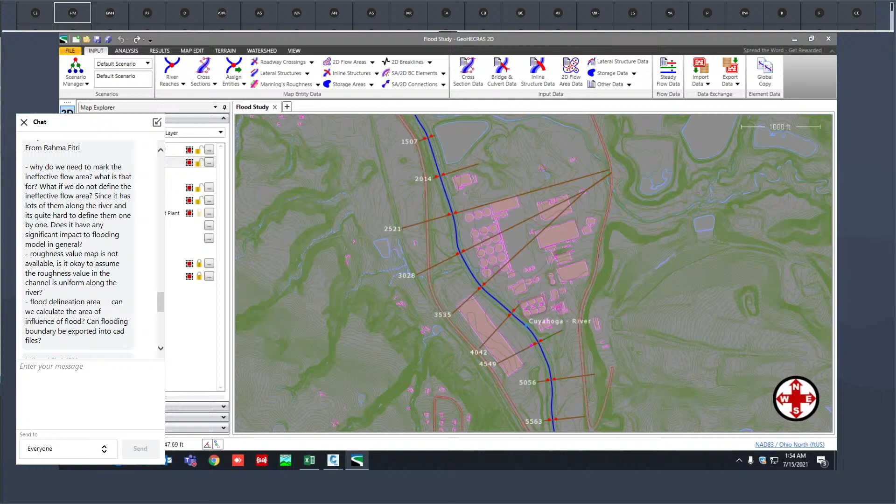Okay, there's a question from Budi. How to do the calibration process? Yeah, we have a semi-automated process. If you already have the field values for the water surface elevation, then in that case, you can go to the analysis menu and choose steady flow calibration. You will need to define your observed water surface elevations here. And based on that, it will calibrate the model and come up with the calibrated Manning values here.

So once you define your observed values here, then you need to click on the Analyze button. It will calibrate the model and come up with the right Manning value that should be assigned to the cross section to come up to a level where it is matching your field values. So calibrating the model is quite easy as compared to that of HEC-RAS because we have the semi-automated process.

You can do that for all the 3 profiles if you want, or you can do that for just a single profile. The only thing that you need to have is the observed water surface elevation on the stages that you would get from the high flood marks. When mostly the flood event occurs, people mark the high flood areas on the walls, on the buildings, or the bridge piers. So once you get that kind of data from the field, then you can simply place that here and then analyze it, and it will calibrate the model by changing your Manning roughness values for each of the cross sections.

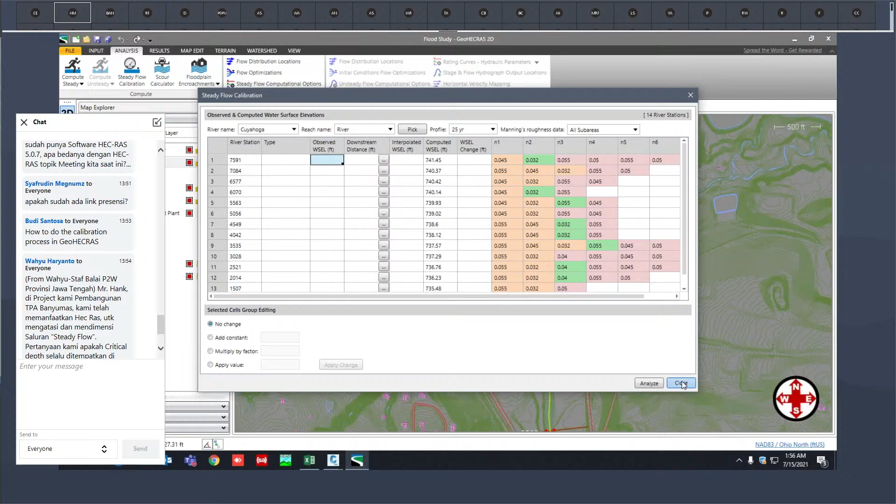Okay, the next question is about flood delineation area. Can we calculate the area of influence of flood? Maybe she means can we calculate how far the flood can impact the area around the river? Yeah, absolutely. Like here for the 100-year profile, we had a discharge of 16,000 cubic feet per second assigned, and it created a maximum flood extent. So this is the maximum flood extent area. Okay. Yeah. So we can predict the damage of the flood. Absolutely. Then you can mitigate it as per how far the flood is extending out.

Okay, the next question from Tamal Fitri. She already has HEC-RAS software version 5.0.7. What is the difference between her software and this software? Well, I think by now, me demonstrating it should have made it clear why it is different. About the features, right? I'll explain two of the differences here. Now, when it comes to HEC-RAS, you have to enter everything manually, but here everything is automated.

Like we talked about assigning the ineffective flow areas, there you have to enter all the information manually, like at what station, at what elevation you want your ineffective flow area to be. Here, you just need to click and draw. That means you're able to save at least 70% of your time just drawing the ineffective flow area. In a similar fashion, when it comes to automated drawing of the cross sections. It comes to extracting the cross sections from any elevation source.

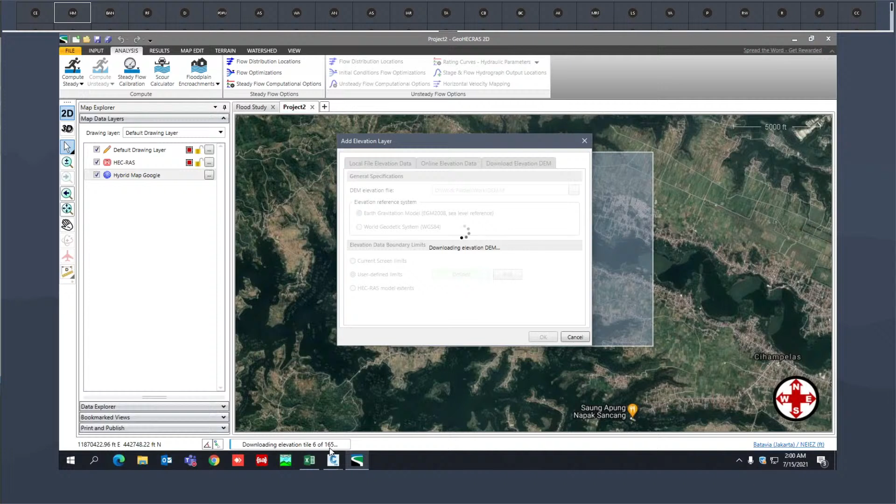This DEM that will be downloaded will not be so precise to be used for the modeling. Mostly if you're doing 2D modeling, it needs high accuracy data of the order of 1 meter to 5 meters. When you have a data accuracy of 30 meters, that's not going to be so good. So in that case, you can simply go ahead and get the survey data from the field. And if you're doing dam break modeling, or reservoir modeling using storage, you need to have the bathymetry of the pond or the reservoir. You need to have the bathymetry of the channel.

In 1D models, it doesn't need high accuracy data. If you just have the cross sections, you can simulate the dam break model just with the cross sections. But for knowing the extent of the flooding or the inundation area, you will need the DEM as well, the digital elevation model. So in that case, I would prefer getting the data surveyed rather than using the online DEM that's available freely in our software. So as it downloads the DEM here, I will show you the accuracy of that DEM, and that is not going to be so good to be used for the modeling here. Okay.

So I will show you one of the models. I did that for, I don't know if the client was from the Philippines or somewhere. It was CES Incorporated, and for them I did a model where they wanted to do a dam break analysis. We did a dam break analysis using both 1D and 2D modeling. Okay.

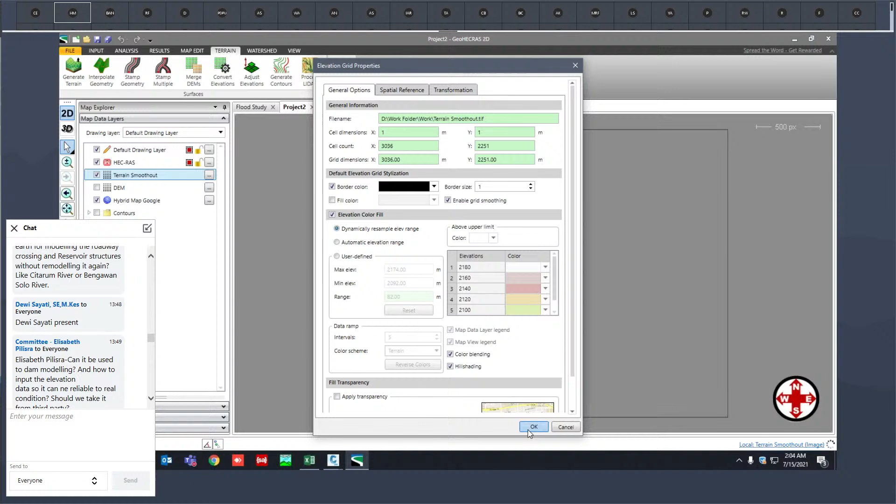So you can see it has smoothed out. So you can kind of make it better by smoothing out the contours and then creating a terrain surface out of it. So this is the terrain that's been downloaded from the software.

Other than that, there is one project that I wanted to show you where we did a dam break modeling for one of the clients here. They had a reservoir on the upstream.

There's nothing to see. You don't see anything? It's coming up. Oh, loading, okay. On the bottom, I just see the progress bar is loading the drawing file.

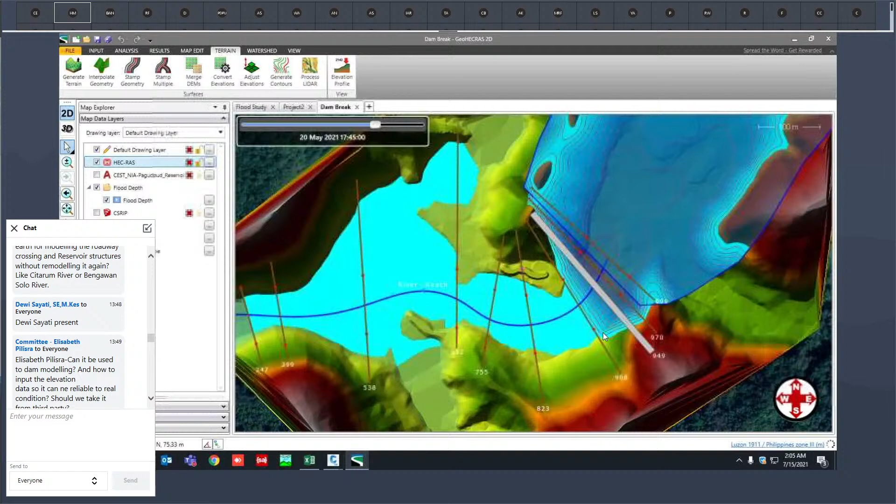And the same model was created for them where we did both 1D and 2D modeling for the same project. Now, this was a 1D model, and then we did a 2D model, combined 1D, 2D, where on the upstream we have defined a reservoir with a storage area, and downstream is a 2D flow area.

On the upstream, we define a lateral inflow hydrograph coming in from this reservoir, and on the downstream, we define the 2D flow area connected using the SA/2D connection, which is modeled as a dam. That way as well, you can do it. Okay. So this software really simplified the work to design them. Yeah, absolutely, very much.

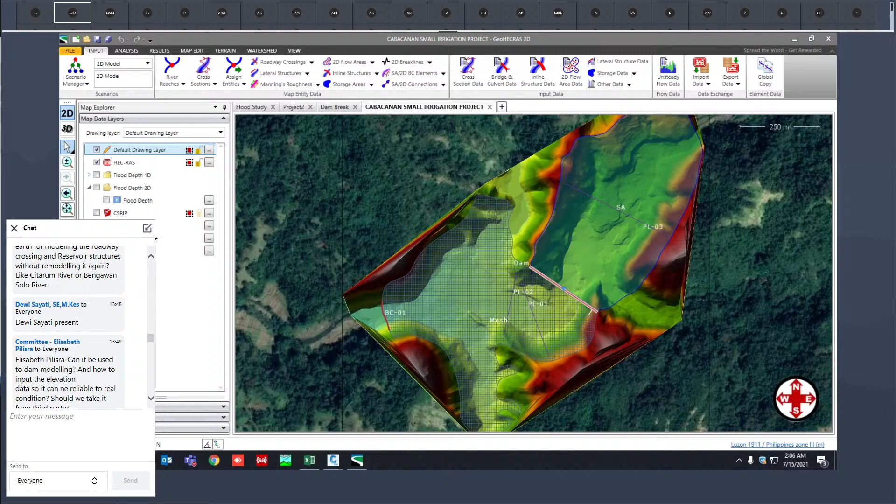How long does it take to model a dam? Well, it depends on how big the model is. Like for this model, it took me half an hour. Half an hour. Wow. It is really short. Okay. The last question.

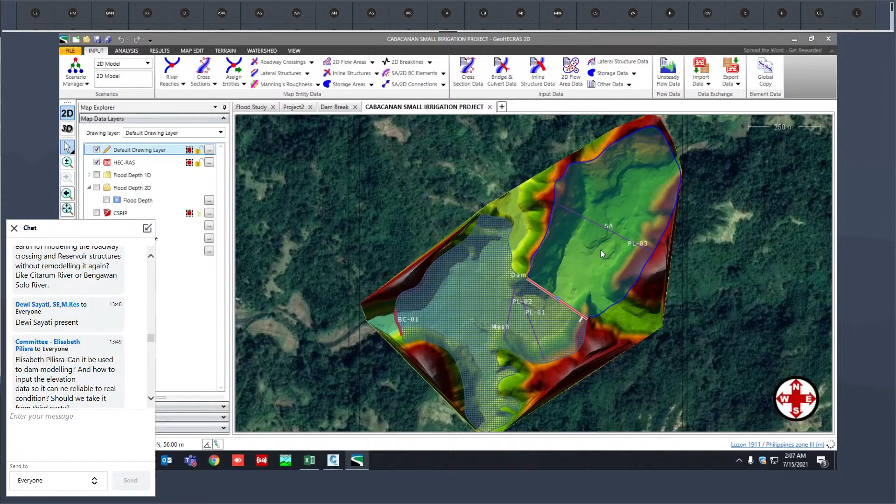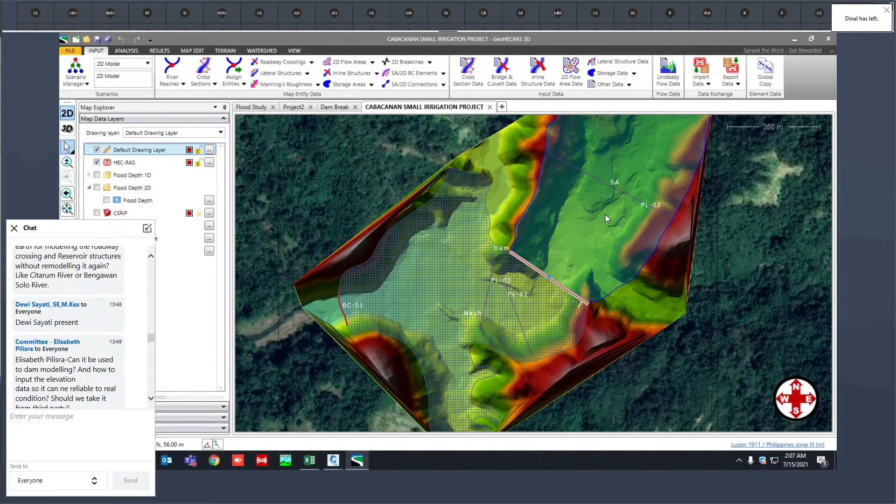Can we use this software to do modeling of river condition prediction for the future? Can we use this software to look at the river model for 10 years later, 20 years later? Certainly. You mean if the river morphology is changing, right? River is changing the direction.

Yeah, absolutely. The thing is that we have not included the river morphology directly into the software. That is because it would have been the same as that of HEC-RAS. Most of the time any modeler spends is while he does the pre-processing, like creating the geometry. That's where most of the time is consumed. You have to prepare the geometry, the terrain data and all such things.

Once you have done that, like here I have created my model, then I can right click and choose open in HEC-RAS. It will open the same project in HEC-RAS, and in HEC-RAS you just need to use two tabs there. You just need to define your quasi-unsteady flow data and the sediment data, and then run the analysis. That's the only thing that you need to do.

All right. There is one good question from Francesco. He's asking whether we can use this to simulate using the rainfall. Yeah, absolutely. For the 2D models, and even the 1D models with 6.0, you can directly apply the rainfall on your 2D flow area. It can be spatially varying or it can be constant, doesn't matter.

If I go to unsteady flow data here, or if I go to SA/2D flow areas, I can assign the precipitation hydrograph. Click on that, define your precipitation in millimeters or inches, whatever unit system you're working with, and it will do the rain on grid model. Rain on grid models are very typical.

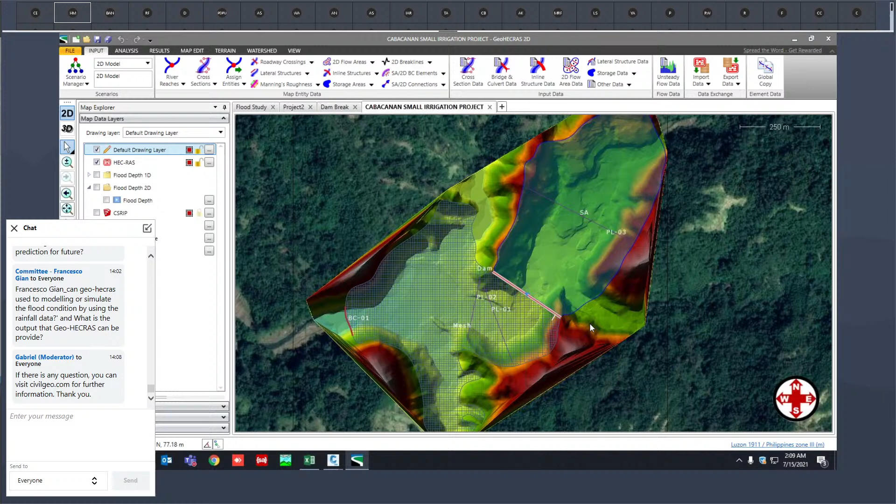When you see the rain falling on the 2D flow area or the storage area or the cross section, that means each cell is getting wet, is receiving some amount of water. That means the number of cells that receive the water will account for the computational time. So in rain on grid models, each cell receives the water, which means it will take a lot of time to run the models. Those kinds of models are very typical, and I have done such models myself as well.

Let me show you one of the 2D models that I recently did for one of the projects, for Pinoni Associates. If I open up that model, they had a watershed for which they had the hydrograph, or we call it rainfall precipitation data. This is the 2D flow area, and this is the terrain data available right there. Now, this is a complete watershed.

So this is a complete watershed. On the downstream of that watershed, you just need to define a boundary condition and define that as normal depth. As an inflow,

I'm sorry, there is a noise here. Okay. Where's this? Okay. All right.

So this is a watershed, and for that, the client provided the precipitation hydrograph. If I go to unsteady flow data and click on the define button, this is our hydrograph. You do not need to define the upstream boundary condition as your flow hydrograph or the runoff. You can simply apply the rain on top, falling on that 2D mesh or 2D flow area, and then simulate those kinds of models as well. In this case, it doesn't have any results, otherwise I could have shown you the results as well.

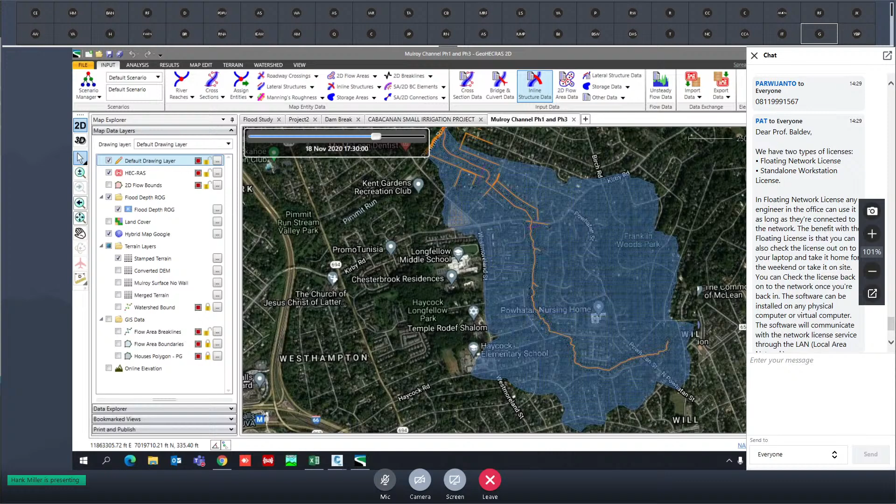Can you read it now? Yeah. The phone number is from Indonesia, so the code is +62. Yeah, I got it. I just got it. I forgot. I mentioned about the licensing options. By mistake, I just mentioned a different person's name.

Okay. Yeah, so you can just read it out that we have two types of licensing options: floating network license and standalone workstation license. This information about pricing can be found on civilgeo.com. Now I'm just sharing the pricing with you guys. Okay.